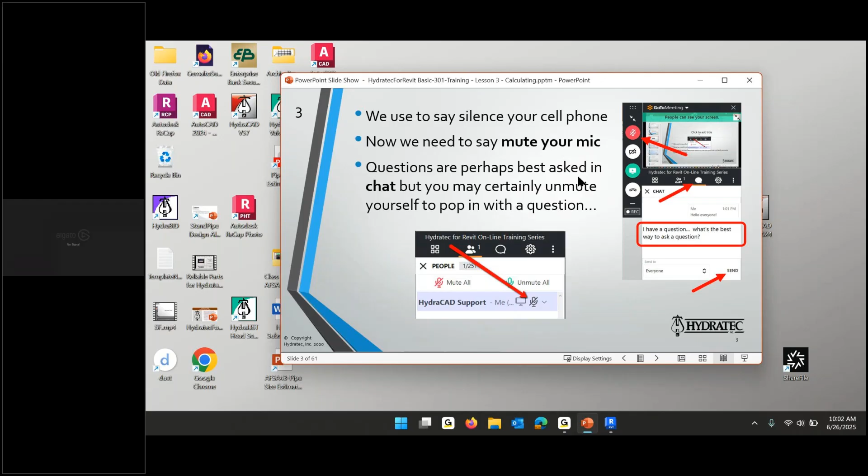Again, the first couple of slides, everybody's been great. I can't think of a class I've enjoyed more in terms of interactive response and everything. So keep that up, and if you need to, you can call in.

And we got here, Brian. Does this look familiar to you? Yeah, some of the stuff though is not on that sheet. You're right. We got almost here, and we left like 6 or 7 slides last Tuesday that we said, okay, we're going to come back on that. And I said I would take those slides, like this detail and this legend.

There, we didn't get to them, but I'm going to. I took those slides and added them into today's slideshow, but I added them at the end because getting our work documented, getting it on a sheet to print out, that's an anytime project. In most cases it's at the end of the project. You get it drawn, calculated, coordinated, stock listed, and maybe before the stock listing you want to get it printed out and sent for submittal. Then you get it stock listed, and then you need to get it printed out for the field. This is meant to be that documentation on a piece of paper to go to the submittal or to the installation. However, you can do it anytime - as you go, at the end, or in the middle.

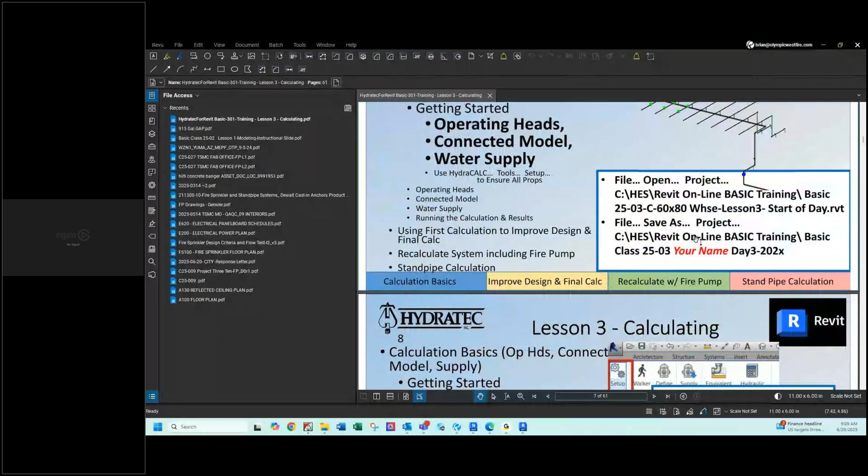All right, so sneak back to Revit, and we're going to do what this thing says. And I'm going to drag everybody through that. Yeah, I like what you're doing there.

If you click there, let's even close this project and reopen it, Brian. So just pick the X on fire protection floor plan. Yep, and save or don't save, I don't think it matters, we haven't made any changes.

And did that close Revit? Yeah, we didn't really mean to do that, but go ahead and open Revit again. Yeah, I know you picked the X on Revit, and yeah, that worked.

But I'll remind you that there are tabs in the drafting area at the top of the drafting area, and there was an X on the tabs that we had open. And if you do that, it closes the project without closing Revit. But now in here, I want everybody to see us pick the open dot dot dot button.

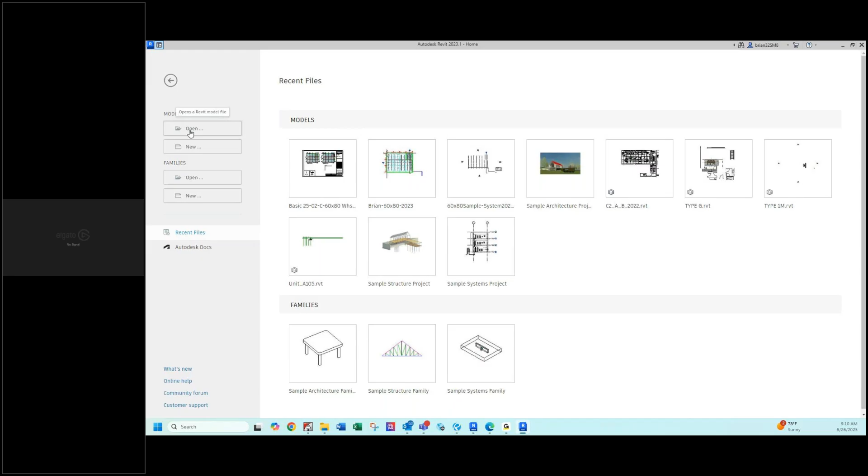And then drive to C, HES, basic training. That's it. And in here, we should find that start of day... not that one, the one that's at the top of the list, Brian. That start... of day 3. Yes, start of day 3.

And I sent it out, I'm going to say mistakenly. I intended to send it out as version 23. I think that's bad on my part. I tweaked it and saved it on my disk, and I didn't put it in the zip file. We're still good, but that's me explaining to myself why we're doing this upgrade. Anyone using 24, 25, or 26 would be doing an upgrade anyway, so it's not bad that we're doing the upgrade.

And as soon as this is open, Brian, we're going to remember to do a file save as and put our name in the file name and resave it. That will do two things: it'll identify it as us, but it will also keep us from having to run that upgrade again if we open that newly saved file.

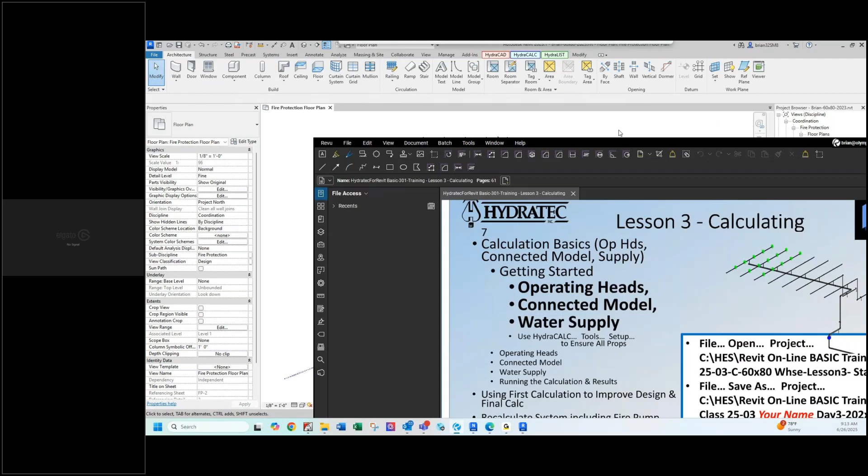We found the fire protection floor plan, and that's a place for us to work. If you could put that slide back up on the screen, slide 7. Then move on down to slide 8.

The first thing we're going to do, talked about in slide 8, is run the setup button. We're going to go to the HydraCALC ribbon and pick the setup button, and that's going to make sure that the project, whatever state it's at, is prepared for doing hydraulic calculations. Specifically, we're going to make sure we have properties on all of the sprinklers, the fittings, the pipes, and the valves.

Those properties came either from Hydratec or from whoever built the family we're using, and it adds those properties. It's best run after you're mostly done with the modeling so you have sprinklers, pipes, fittings, and valves in your project. Once your project has those parameters, anything new that comes into your project will assume those parameters, so you don't have to run setup over and over every time you run stock list. Once per project.

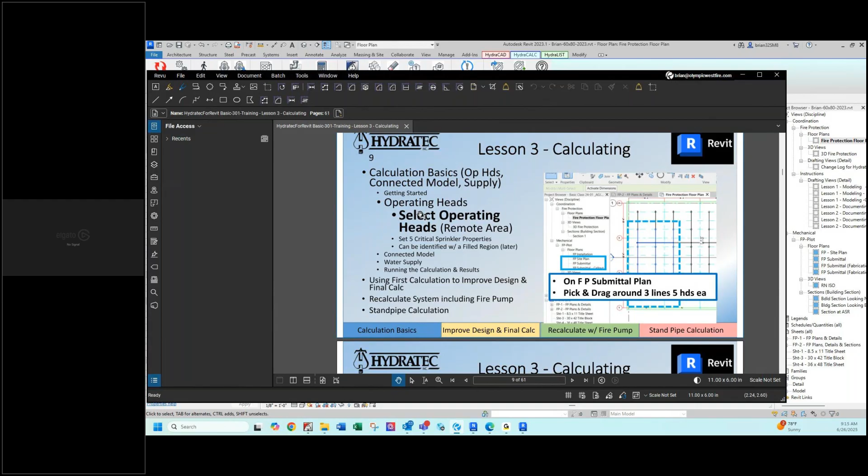There's two ways to do that. You can actually draw a box around it and use the box to identify the heads. But in this basic first time around, I'm just picking the heads and telling those heads that they're operating. So on that FP floor plan that you opened, we're going to click and drag a window around 3 branch lines, 5 heads each on those branch lines.

I like where you're starting, and I like where you're going - that's going to be perfect where you're at there. Now, obviously, Brian, when you pick that, you got pipes and fittings and sprinklers. But if you look in the properties box right now, it says common 64. Do you see that at the top of the box there? Yes, that's you picked 64 items.

If you do that pull-down, it says I'm trying to show you the properties that are common to all 64, but there's sprinklers 15. Click on that - now the properties box dials in specifically to the properties for those 15 heads. Even though you picked pipes and fittings and stuff, there's the properties of the 15 heads you picked. You like it? Yep. And scroll down to fire protection.

I'm going to skip one slide ahead here, and we'll review it in slide 10. In slide 10, we say the fire protection has 5 properties we really care about. The first is density, and that's already 0.15 - over a week ago, when we did the spacing and layout, we put 0.15 in when we laid out those heads. Minimum pressure, we put 7 - we did that also. And the 100 square feet area, we did that also. So those three we kind of got for free.

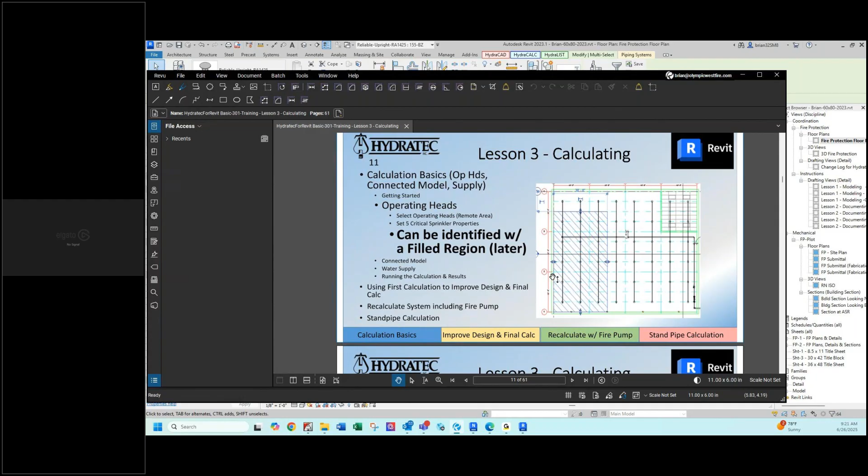Okay, let's go on to slide 12. And that's the middle of the song, connected model. And all that means is we're going to have a supply point, that's where the water comes in. We've just identified the operating heads, that's where the water comes out. There obviously has to be a path for the water to get from the supply out to those heads.

And this slide shows us using the walker, and the walker lets you pick a pipe, and every other pipe that's connected to it will get selected. Easier, I'm telling you, it's easier than picking a window around stuff, because the window sometimes can miss things. The window can't possibly go off of this view, but the walker will. It says that one's connected, I'm selecting it. That one's connected, I'm selecting it. So even if we were zoomed in and we were like real close to the remote area and we picked one pipe, it would find all those other pipes connected to it.

I think we can treat ourselves to slide 13. This was just saying the walker's a good idea, and 13 says you actually type WW or you pick walker off of the HydraCAD, HydraCALC, or HydraLIST ribbon, and then you pick a pipe and you'll see everything light up. Let's just go do that, prove it to ourselves.

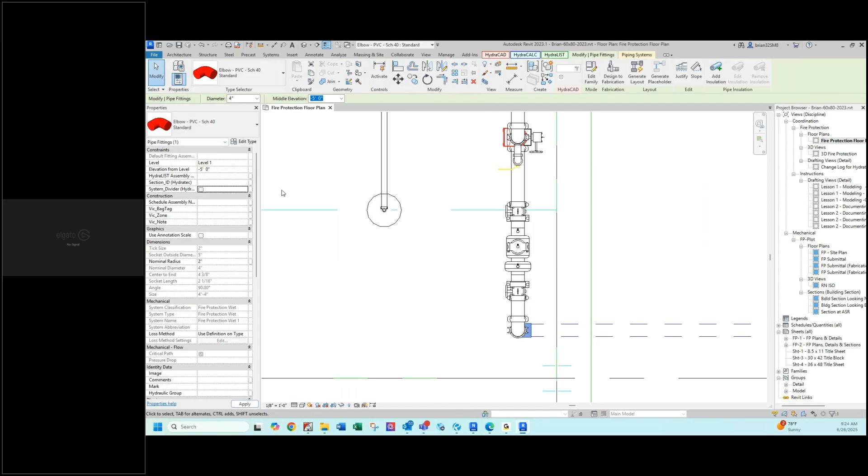And the properties for that elbow in the very top set includes a property that says system divider, and it's a blue check mark. Uncheck that and do the walker again.

Okay, do you see what happened? There was a property on that elbow that said, don't go through here. It's a system divider. So the walker sees that and says, oh, I'm going to stop here, he told me to stop here. So I can take my system and divide it up into various pieces if I want to.

Is that for any fitting we can put that on, the divider? I'm sorry, say again, can we put that divider on any fitting? Any fitting or any pipe, got it, and even on a valve. So pipe, fitting, or valve.

In the bigger picture, say I had a 4-story building, when I run the calcs, and it's not bird caged, when I run the calcs on the third floor, I want all the piping on the third floor. I might even want to stop there and just do a calculation to the floor control assembly, or I want to do all that piping plus the standpipe, the interfloor connections. But I don't need to submit for calculation the second floor, the first floor, or the fourth floor. Things obviously go better and faster if I'm sending what needs to be calculated, not the whole world.

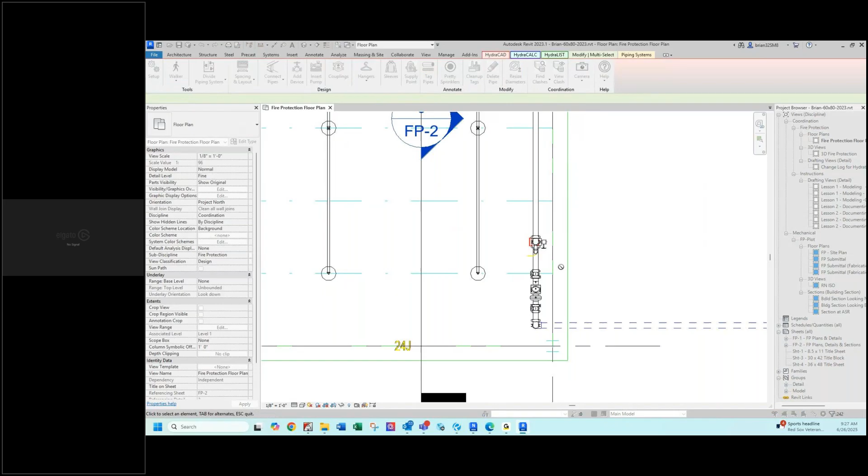And pick on the underground. So you see, you can get multiple selections by using the walker over and over.

And if you had a huge warehouse, a 1,000,000 square foot warehouse with 30 sprinkler systems in it, if you're calculating system number 9, you only want to do the walker. It would be good to have a system divider on each control valve, and then you could click on system 9, and you could click on the underground loop, and you'd have all the piping that you needed for that.

Brian, had you used system boundaries in HydraCAD before? I haven't, now I've used the stop function. Yes, that relates more to the stock listing, but it's, yeah, this idea.

I want you to do all this stuff, but stop here, and this is that idea. If you'd used the system boundaries, it's a much bigger pain in the neck than this because you've got to draw a boundary around the stuff you'd like to isolate, and that's not always a rectangle. It could be a rectangle with a long tail on it for the underground or something.

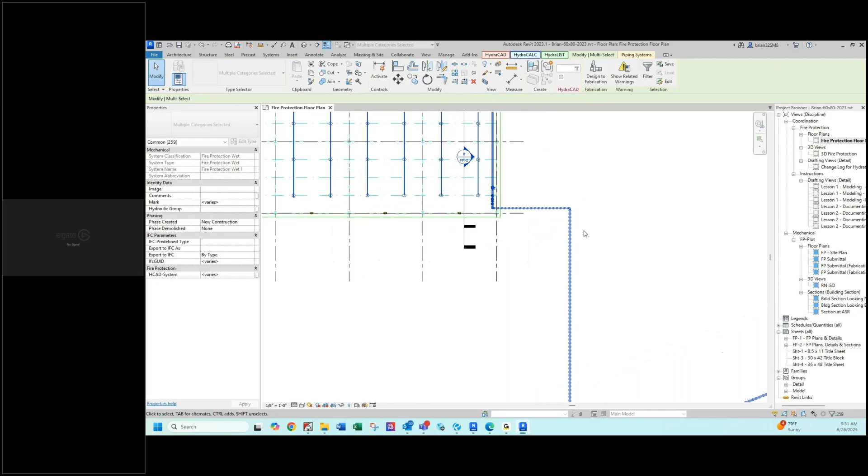I'm going to go with this slide. There's really no reason we couldn't calculate out to the street, but I'm going to have us follow what's in the slide here. We're only going to calculate as far as that first elbow in the underground. So if we go back to the plan view and zoom in on that first elbow, perfect, and then go to the HydraCALC ribbon.

Over on the left in the setup panel is supply point, three more buttons to the right there. No harm in running the setup any number of times — you only need it once per project, but no harm in doing it multiple times. And now pick that elbow.

I think on slide 16 I describe a little bit more about that. The supply point can be on slide 17 — I'm sorry, I lied. The supply point can be on any fitting. An elbow is a fitting, a T is a fitting, a butterfly valve is a fitting.

That was a question, Brian — a quiz. Elbow is a fitting. Butterfly? Is it? It's a valve, but yeah. So elbow, you and I might loosely think of it as a fitting, but I'm going to take this opportunity to say...

Revit has four basic components of a sprinkler system, and each of them behaves in its own way. A sprinkler doesn't behave like a pipe, does it? No, it doesn't look like a pipe. You can't make it longer or shorter, you can't change its diameter. It's pretty much a fixed device.

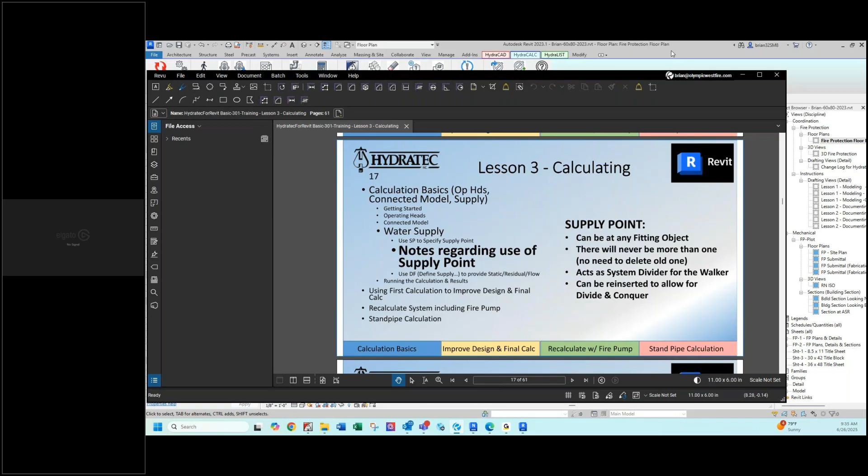Sneak back to AutoCAD, to Revit. David's the one that wants to sneak back to AutoCAD. And now WW for the walker and pick on the sprinkler system.

And then WW to get the walker going again and pick on the underground. Remember, the whole underground lit up before, but now only to the supply point. The supply point is acting as a system divider. Is that right?

While we're here, this is written on slide 17, but you don't have to go back there. It says it can be reinserted to allow for divide and conquer. I want to credit Julius Caesar for divide and conquer. He would go conquer a country in the middle of two other countries, and then he could pick on the other guys one at a time, rather than trying to do battle with the whole of Europe at one time.

When we try to run a calc and we get a problem and we can't get the calc to run, we can play like Julius Caesar and divide and conquer. Zoom out just a little bit, and presuming we have this selected, David, Brian, and we want to run a calc, and for whatever reason, the calc won't work. We say, what's wrong?

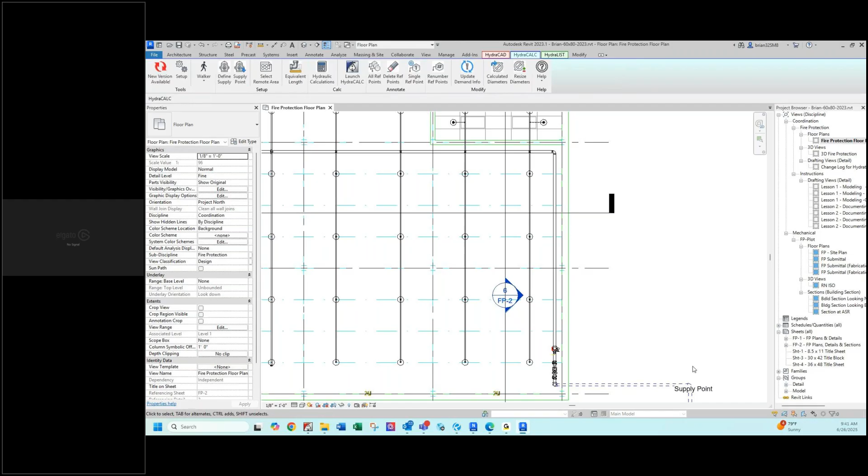Okay, so let's put the supply point back at that original elbow. You just pick supply point. And there it is. Okay. I don't know if I got it on the elbow. There we go. I don't blame you for wondering, I was sort of wondering that too.

I think it's actually okay to move it after if you want. Go ahead and move that out off to the side a little bit. Just grab it and move it.

That elbow was drawn funny. It's like 4-inch pipe to 6-inch pipe, and it drew a 4-inch elbow and then put a reducer. That reducer is a fitting, and when you put the supply point in that area, it went on the reducer instead of the elbow. I don't think it would change the calc, but we noticed it, and now we're convinced it's on the elbow. That's a good thing.

Okay, let's treat ourselves to slide 18.

We've done the where is it, and now we need to do the how much is it, and that's a button that says define supply, or just the shortcut DF. I show picking it off to the side of the riser in the plan view, and it's going to be 55, 44, 11, 50.

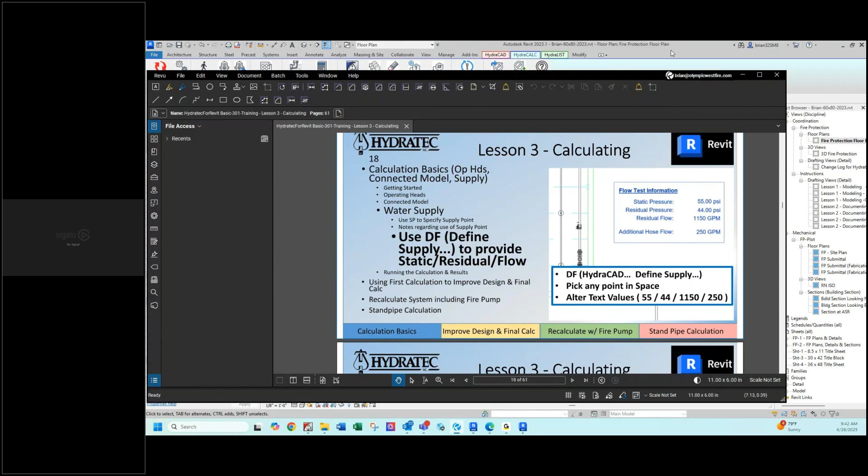So back in Revit, we're going to click define supply, and we're going to pick off to the right of the riser there somewhere. And now it's movable anywhere you want, and we want to define 55, 44, 11, 50.

Two ways to do it. Click on the box itself anywhere and select the whole box. Do you see the properties off to the left in the properties box? You can change the numbers in there.

Alternatively, if you pick again, you could highlight the 90 right in the drawing and change it there. Either one. Watch, when you change it, you're changing it in both places at the same time. 55, then 44, then 1150.

Perfect. And we'll leave the 250 for hose. Is this a tag or what is this?

It's a generic annotation. That must be a Dave question. Does that have a follow-up question, Dave? Nah, I understand now. I was just wondering if it was tagging something, but you said it's just a generic annotation, a generic tag. So it needs to be in the model, but it doesn't actually associate with an object. Just wondering if it was associated. That's all. So, but it's not.

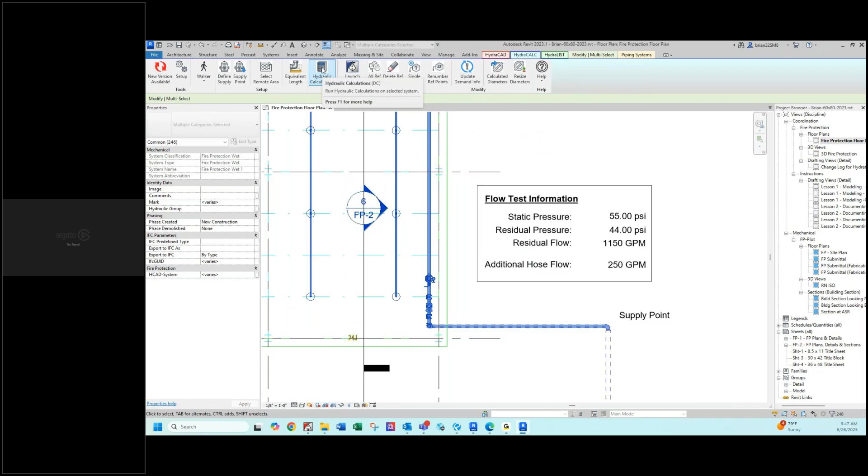And we're going to... give me a second, that's just saying there's a newer version. That's not 'you're dead in the water,' it's just okay, there's a newer version. So we're going to say okay. And there's that dialog box.

Now I guess I'm going to divide this up into two major things that we're trying to ask for in this dialog box, Brian. The stuff at the top is what do you want to calculate, and where do you want to put that calculation. So this is going to read the model.

It's going to create a WXF file, an input file for the standalone calc program, and the name of it is going to be Brian 60 by 80 2023. And off to the right, you see where it says area and it's got RA1?

We only marked 15 heads. But if we had marked 15 as RA1 and a different 15 as RA2 and a different 15 as RA3, we'd have a choice of which one of those three we want to calculate. That makes sense? Yes. There's two relatively new buttons right below that.

That's it - load defaults, apply. Okay, next one. Now I understand. The apply button - it felt like you were applying underground or something. That's not what I was doing. You're applying that whole grid of information.

I got you, Alan - is this something we have to do per project, or just a one-time setup? Once per type of pipe you ever use.

Got it, okay. Now quickly put Brian back in charge. Okay teacher, I don't know if we need to do that. Okay Brian, you're invited. Thanks.

Does everybody have this newer matrix filled out, and does everybody have a continue button that's lit up? Yes. Would we want to change the welded lines to Schedule 10, or just change it on this screen? Once it's in here, you can change it, but if it's not in here yet, you have to go back to that classic screen to get one in there.

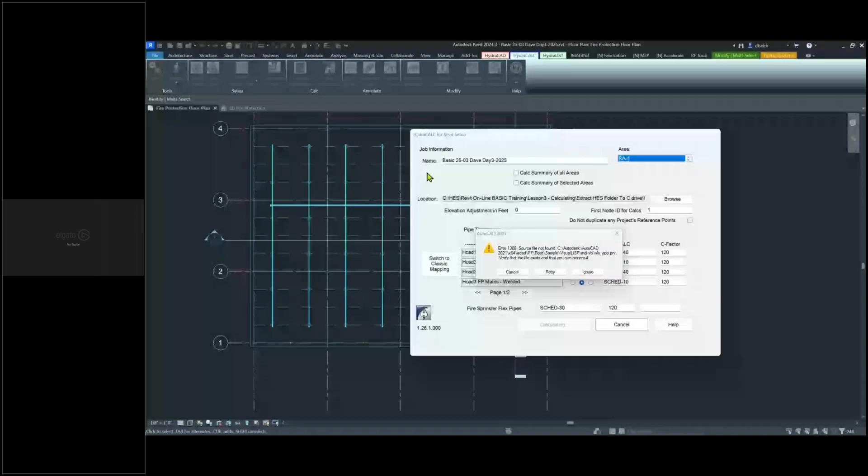There we go. Okay, so this, when I was talking about the calculation didn't work, this is an example of the calculation didn't work. Are you with me?

Yep, I'm following now. Error something, and this is a really weird one because it says AutoCAD 2021. What? I didn't know that we were AutoCADing anything. It's talking about C, Autodesk, AutoCAD 21, X64, AutoCAD, PF, Root, Sample, Visual Lisp, blah blah blah, PRV.

Verify that the file exists and that you can access it. I'm tempted to just pick ignore. Yeah, I'll say before that error popped up, there was one right before it. I can't move it onto the screen. It says, please wait while Windows configures AutoCAD 2021.

Yeah, okay. That is in, I'm suspicious that there's even a HydraCAD card for that. That's an installer problem in AutoCAD.

Okay, um, and I want to try and take advantage of the teaching opportunity here. Can you take a screenshot of this so that we can minimize? I'll take a screenshot and send it over to the chat.

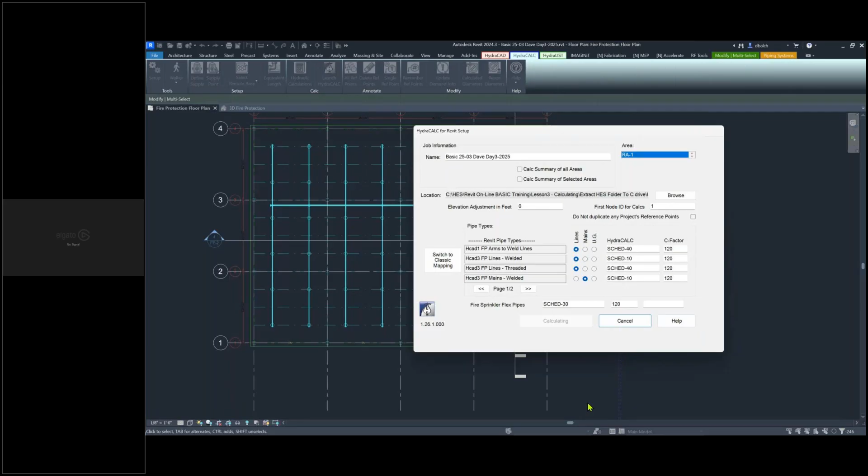I'll say one more thing and we'll keep moving, because I don't have a problem to show you. If you get an error like 1308, write down something significant about that error. Most importantly, hover over the last button you picked before you got the error, which was hydraulic calculations, and hit F1. That brings up the help for how that button works. Scroll all the way to the bottom, and there's a place that says troubleshooting. Click on that, and it gives you a list of all the ways it doesn't run. If you look at that list, I expect you'll find error 1308, and it'll say this is what went wrong, this is how you fix it. I've got to leave it there till I can really show you one, but that's probably one of the most important parts of the training I can give you: there is help for every error you're going to get.

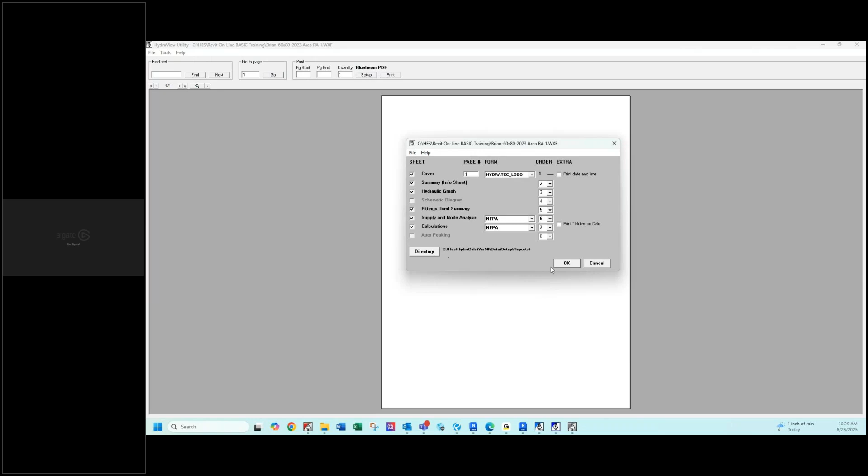And there's a cover sheet. Okay, we have to fill this in, and it says print the cover sheet, print the summary, print the info sheet, and the final calculations. Normally this is just fine the way the defaults are, so we're going to pick OK.

And here's the cover sheet. You see, this is Brian doing it, so it's got his company name in there. And we'll scroll down to the next sheet.

And this has the information we typed in a minute ago. We're on sheet 2, yeah. So RA1 is in there, OH1 is in there, the 1,500 square feet is in there. And I mostly want Dave, you to see this. These are the pieces of paper you're going to submit with your drawings to the authority having jurisdiction. And in place of just a note that said Brian said it works, I was going to use that one.

One more sheet. Yeah, this one has, if you look on this graph paper, Dave, on the left is point C1, which is 55 psi at zero flow, and C2 is 1150 at 44. Do you see those two points on this graph? C1, yeah, I see him. Yep, C2.

Those are those numbers we put in for the water supply, when we said define supply, way back with that generic annotation thing. Yep, 55, 44, 1150.

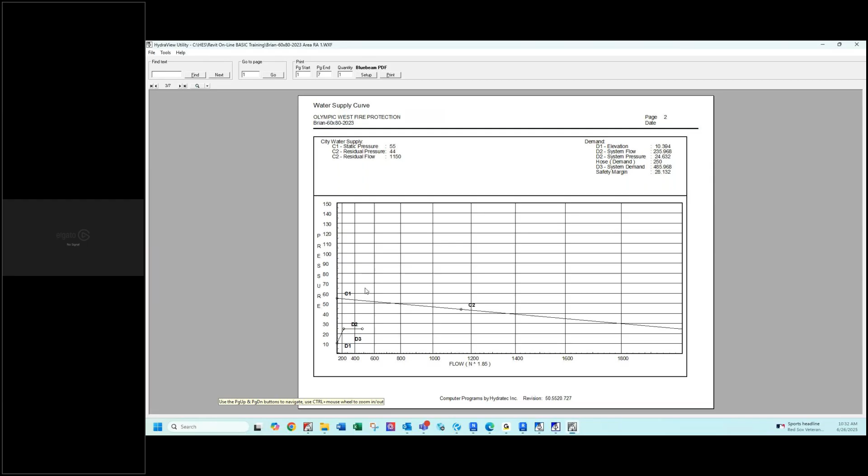We'll close this. And we'll close this, Brian. I'm promising you that it's going to get saved if you made any changes in here. Oh, I did have a slide about, did you close it already? Good.

28 pounds or 30 pounds safety margin is a little much, you think? Yeah, we might get away with the branch lines being 1.25 inches instead of 1.5 inches.

So let's click in the third column for diameter at the first one that shows up, 1.5, and then pick on the binoculars. And we're going to say change 1.5 to 1.25, replace all.

And now it's calculating with 1.25 inch branch lines. It just reminds us it did 18 of them.

We'll exit, and then we'll run that calculation button again. The yellow stuff should still be exactly the same as before. So we'll pick OK.

And now we're 24 instead of 30 pounds under the curve, so we still have lots of safety margin. We could play more, but I just wanted to show you, you've got this spreadsheet that you have control over, and you can say what if this, what if that, what if the other thing, before you return to the calcs. So we'll pick OK.

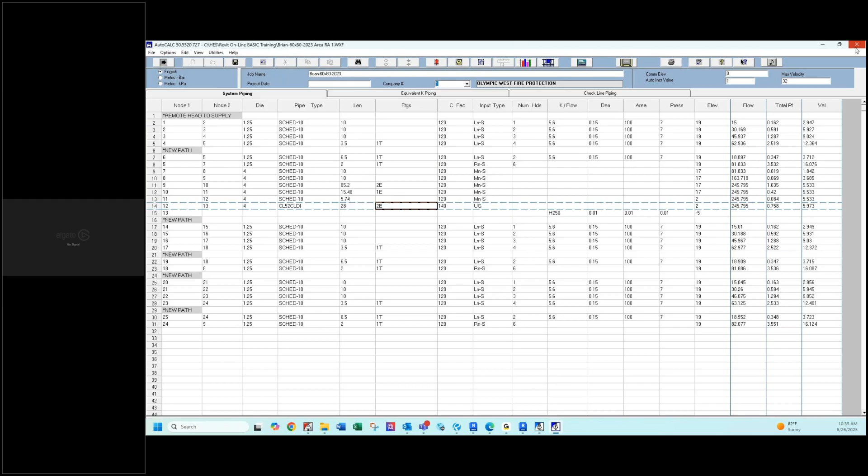We'll click the X, and you made changes, you changed it. They will be saved in this file when you pick the X. And go ahead and say yes, it's been a while.

Now that fuel gauge and the annoying questions are all gone, and we've run the calc. We're going to click on Return to Revit.

Two things are going to happen. First, it put hydraulic reference points on that we'll see in a moment, and it's asking us to park an answer block. I'm going to say pick up and to the right of the water supply information you've got there. Yeah, click there.

So there's the answer block, and you'll see in the answer block is the 1,500 square feet and the RA1, and the pressures and flows that we calculated.

I'm disappointed that it doesn't say OH1. That seems like it should have shown up. However, it's just a generic annotation. If you click on that dot next to occupancy, right there, click again, you could type OH1 in there.

Mine doesn't show the total required pressure. It shows the safety margin, but doesn't show either of the two above that. Then I'm thinking an update to the toolbox would do that. That block reports that generic annotation has changed a couple of times with the toolbox.

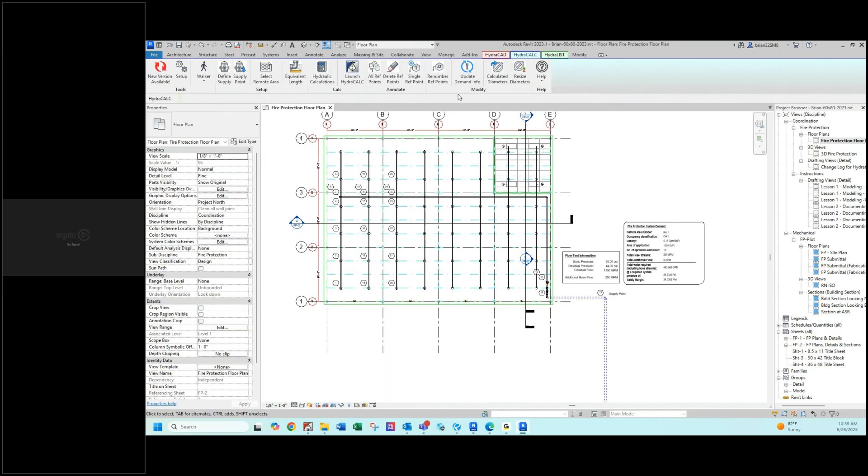There's no reason we can't do that too, Brian. Click that Update Demand Info and then click on that box. Well, it took away the OH1.

Yeah, I think we'll pay closer attention when we get into the calc, but I'm thinking that's blank in the calculation file. That's what's making me think that's why we missed it. I saw you type it, but I don't think we hit enter or something, Brian. We'll look again when we get there.

It was on the info sheet. Is it pulling some of that information from the actual cover sheet information, or is that pulling it from the calc itself? It's from the WXF file, which includes the cover sheet and all the input. Okay.

Okay, let's get back to having some more slides here. I want to go to slide 20. We probably have a couple of review ones. Slide 21.

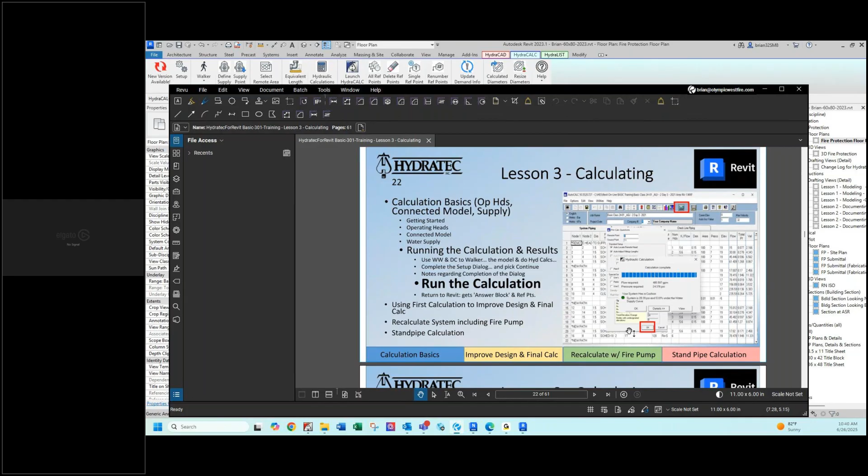Let's go to slide 22. When you're in the calc, you say run the calc and you check the yellow stuff, and then you get the answer.

But you could input all of that information directly from a napkin sketch into the standalone program. And that's a really good exercise for those of you that haven't been exposed to this program before, just to get an overview of the different things you can do in there.

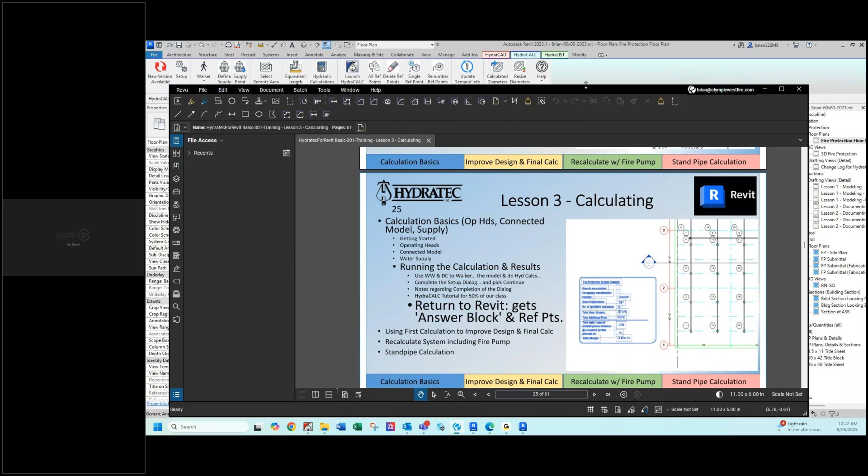And we're on to slide 26, which is yellow, which is great news, except by the colors, we're a quarter done with our slides, and we're half done with our time.

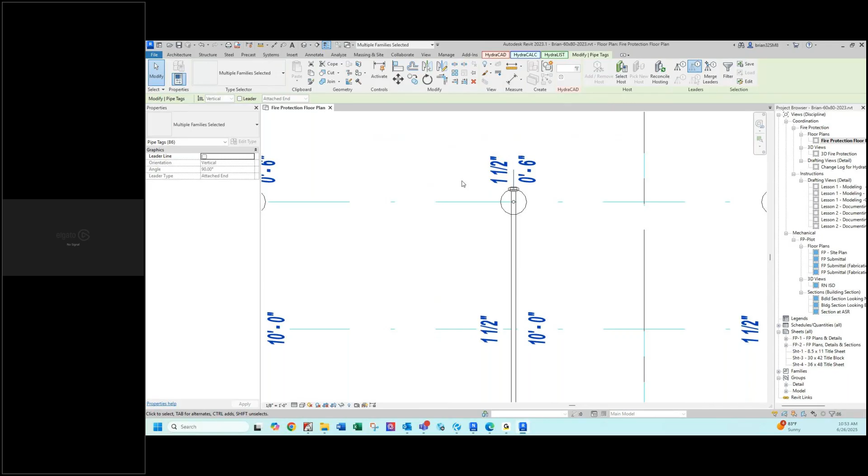And there's a box at the right end of the cross main that says, I did my best to clean stuff up, but there's some stuff in here that I'm not happy cleaning up myself. I just wanted to make you aware of it. So if you click on that box, you could erase it. Just hit the delete key.

And if you zoom in, the 4-inch, 3 foot, 6.5, maybe you could click on that and just use the right arrow to nudge it to the right a little bit.

And it looks like the 1.5, that one you could nudge up north a little bit. Okay, so he was just drawing your attention to that one. I'm sure John is going around and moving all of those things.

There's some cool stuff on the way for all of this dimensioning, but I don't want to turn this. This is a calculation process here, so I want to keep us after the hydraulic calcs. So let's go to slide 26, 27.

Hey Brian, is there another way to get the TP? For some reason my shortcuts don't work. Okay, yes, you go to the Hydra, it's on the HydraCalc ribbon and it's on the HydraCAD ribbon. Okay, HydraCALC, I'm looking at it, but I don't see TP.

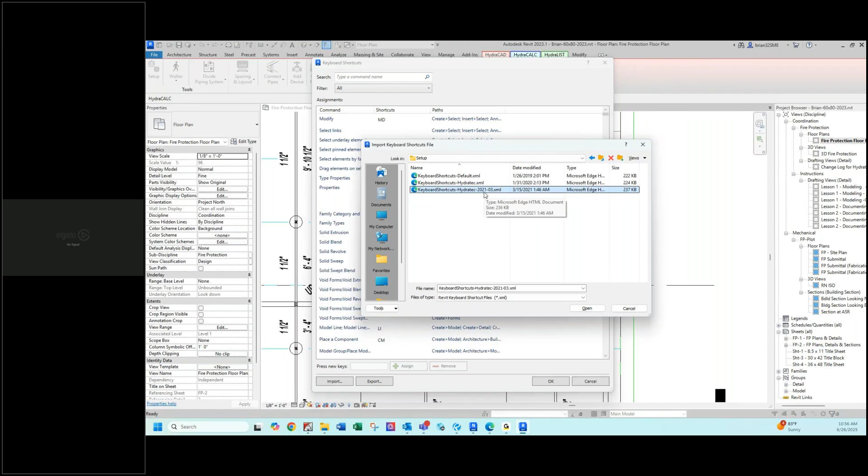Then pick open. Then if you trust me, pick overwrite. If you have done all kinds of customization in Revit already, pick merge. Then close this dialog box, then hover over the tag pipes button and tell me if there's cause for much rejoicing. Yeah, it's there now. Alright, thank you sir. You bet.

So on slide 26, I wanted to show you putting those tags on. On slide 27, we're going to talk about how we changed in the calculation, we changed 1.5 to 1.25, and I want to show you that there's a button to take advantage of that. And then even though there's a button to take advantage of it, I feel like there's a better way to do it, we're going to do that also.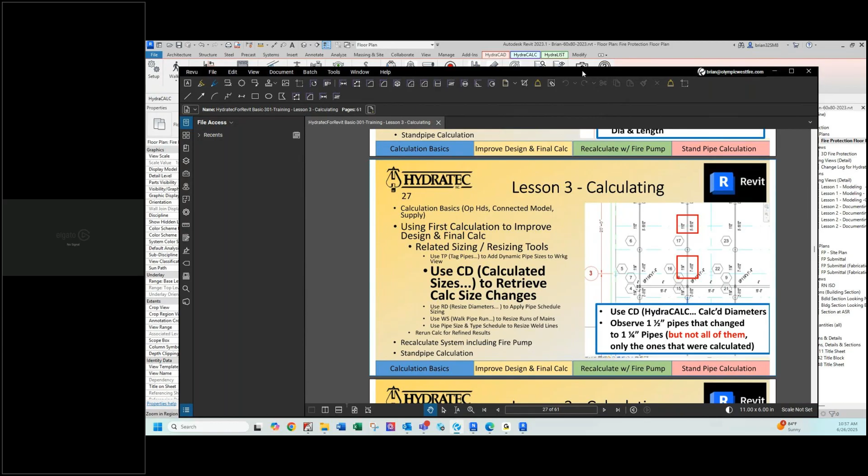But first, go back to Revit and zoom in on the calculated area so that we can see it. You see those diameters are all 1.5. Zoom out just a little bit so we can still read the 1.5s. Perfect, that's perfect. Now go to the HydraCalc ribbon.

There's a calculated diameters, or CD, pick that. And don't go anywhere, Brian. You notice the 1.25 showed up? Yep, cool. But look at the 4th branch line from the left there, how come that one's 1.5? It's not in the calculated area.

Exactly. This button is just a little, it is by its nature too literal. It says if it's in the calculation, make the drawing be like that. But it's not all of what we want to do. So I'm going to have you pick the undo button and get the 1.5s back.

Instead, I'm going to have you look in the project browser. There's a plus sign next to schedule/quantities. You're right there, click that. And then there's a pipe size and type schedule. Click that and open it.

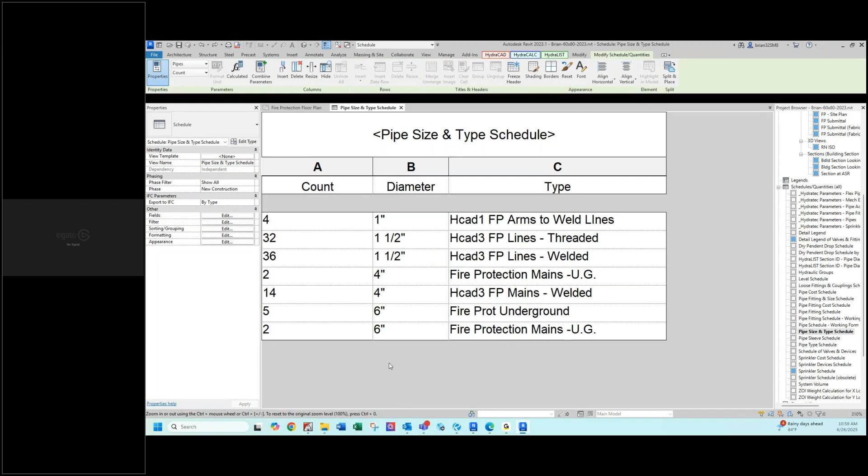And that's not unique to schedules, that's a standard feature for when you're using southwest.com or hydratec.com. If you go to the web browser, that scroll wheel makes stuff bigger and smaller. Who knew? I think that was only a Revit 22 or 23 new feature. Is it really? Yeah, well maybe there was no way, and then when they did it, they did it using sort of a modern standard. Yeah, 'cause I remember about it, Revit 20, Revit 21, it was always so small.

So it was lost on me for the next couple of years after that because I didn't think to use a web standard for that. Okay, cool.

Brian, do you see the third line down shows 36 pieces of 1.5 inch pipe lines welded? You click on that 1.5 inch, dial in 1.25 inch, then close the schedule. We want to do both, so we could also do the lines threaded. Now close the schedule, and we've changed them all. How's that for cool?

Nice. Alright, so what button is that again? We went to the schedule - the pipe size and type schedule.

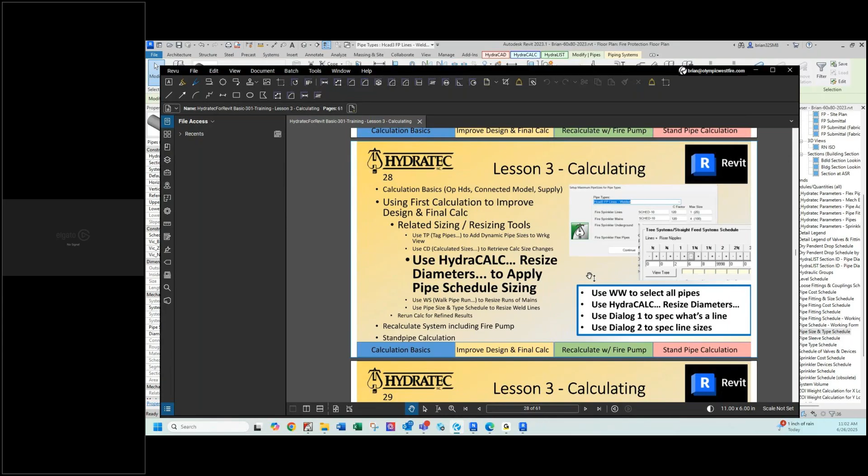There is another button that says resize pipe, and with it you can define what a branch line is. You want to be careful to define just the lines threaded pipe as lines - everything else should be mains or underground. Then that brings up a schedule where you can say I want 2 heads on 1 inch, 4 heads on 1.25 inch, 100 heads on 1.5 inch, and it'll resize the threaded branch lines that way. But we're focused on getting another calc here, and it's not even in that area.

So let's move on to slide 29. Here I want to describe how you could change the main. You could change it the way we did before with the pipe size and type schedule, but you could also take a run of main and change it. I think I want to do it and undo it, so I can show you that.

Go back to the Revit model. Find the cross main - I think it's a little north of what we're looking at right now. I want to show you the WS button, so type WS and pick on the cross main.

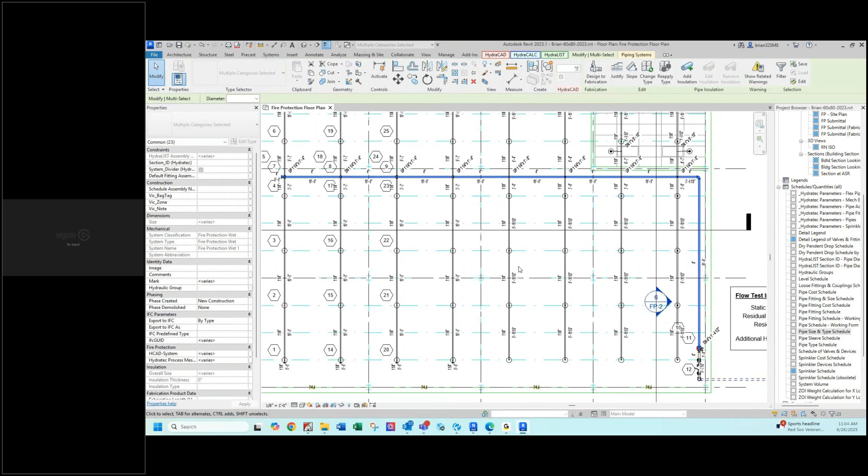So it's a way of getting a run of pipe. One more illustration: escape, escape, escape. Do WS and pick on one of the branch lines. By example, Brian, can you see what this is doing? It's doing a run of pipe. The riser nipple is not selected, and obviously beyond that isn't selected either. Got it? Is that based on pipe type?

I don't believe so - I think it'll switch pipe types. So if I change the pipe type halfway down the main to another type, would it still select it? I believe so, I'm pretty sure, though that's probably not terribly critical. If it didn't, then just do WS again on the other side. But I'm pretty sure it doesn't - it stops at T's, dead ends, and valves. Okay, that's a better explanation for me.

So you could select a run of pipe and just change the diameter from 3 to 4 or 4 to 3, whatever. We're going to keep going - we're not going to change it, I just wanted to show you that's available to us. So let's go on to slide 30.

Slide 30 is great because it's a summary. In the order of things, I said, oh look, we did calculated sizes, but I got a better way. So we used the pipe size and type schedule. We're experts at that now, so we'll go on to slide 31.

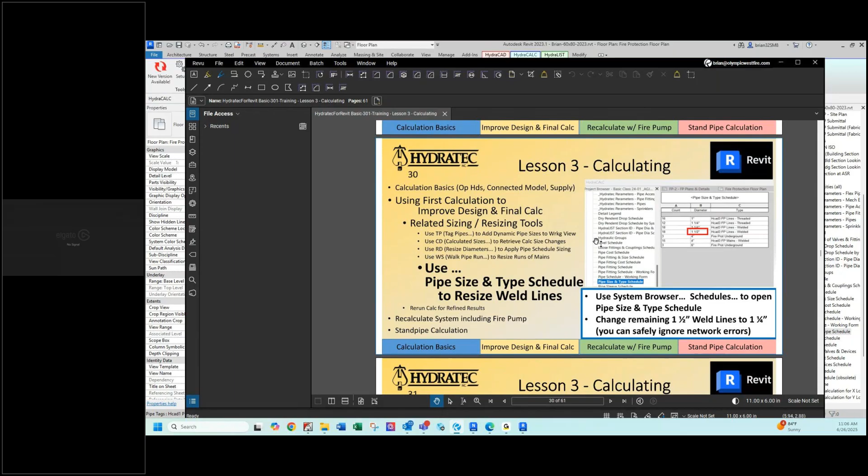Who was it that offered S101, S102, 103? I just mentioned that's how I normally tag mine when I do that. Brian, that's your plan. Cool.

So we're going to go tag them that way, and we're going to use the R button, or the renumber reference points button, and use your scheme. Let's go back to the CAD model, the Revit model, and on the HydraCALC ribbon is a button that says renumber reference points. Right there, pick that.

Then type S101. What this is going to do is increment the number at the end. So continue, and there's a reference point at point 1. Click on it, it becomes S101. Then click on 2, then 3, then 4, then 6, not 5.

Okay, yeah, we screwed up. We're going to come back and fix that one. It's on, mentally onto 6, which I want you to go to 14 and do.

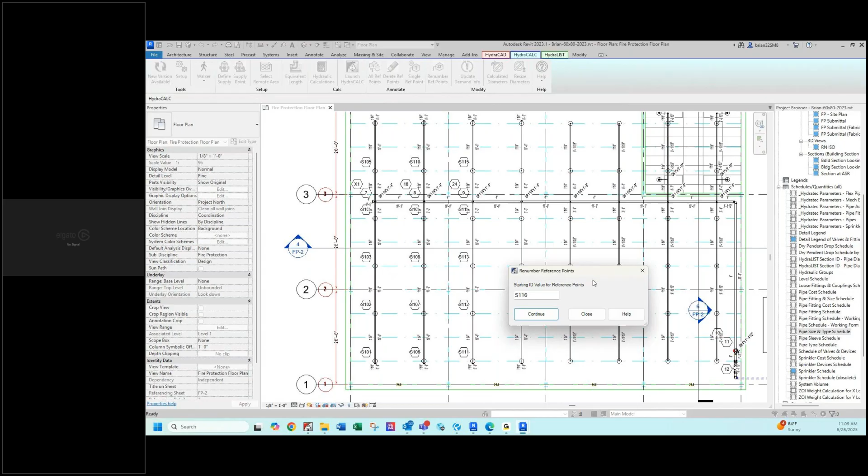Escape once. I think you said A101 for the riser nipples. Yeah, I usually do like B101 for the top, A101 for the bottom. Okay, so let's type B101. And click where it says X1, that's the top.

And then 18 is the top of the next one, and 24 is the top of the next one. Now escape, and A101. And then what currently says 7...

And zoom way out. I think 11 is, so 10 and 11 are like the top and bottom of the riser. And 12 is getting to the underground, and 13 is the supply. You might want to just say BOR, TOR, backflow test. Or do you want... that's the one that says 10.

And escape, escape, escape. You can use this tool that way if you want, but you can also just do them right on the block. So cancel this.

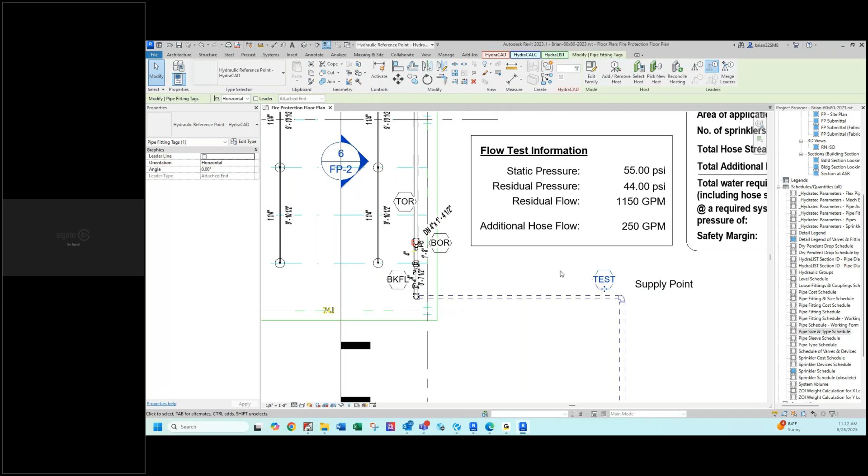Before I lose my train of thought, let's click on 13 and make it say test. Are these the reference points in the calculation, like the Excel looking sheet, when you said like 1 to 2 and 2 to 3? That's right, that's correct. And we're okay changing them. When we run the calc again, it's not going to use those ones, it's going to use these ones.

Alan, quick question: if you move an annotation, say top of riser, so it's clearer, is it still associated with the top of the riser? Absolutely, way better than AutoCAD. In AutoCAD we were using the location to match that up. Much better. Okay, I want to show you a couple of things.

Let's, in another operation, Brian, zoom to the connection of the feed main and the cross main. The diameter, the flow, and the pipe type, none of that changed, so it didn't put a reference point at that elbow. But we're going to, there's a button called single ref point.

Click that, then click the elbow. And drag that off to the side where it's readable. And let's just make it...

A104. So you can number reference points ahead of time, and they will be included and made part of the calculation, Brian. But that's not as quick or reliable as just putting reference points on, and then I'll tell you what I want them to be. Does that make sense? Yeah.

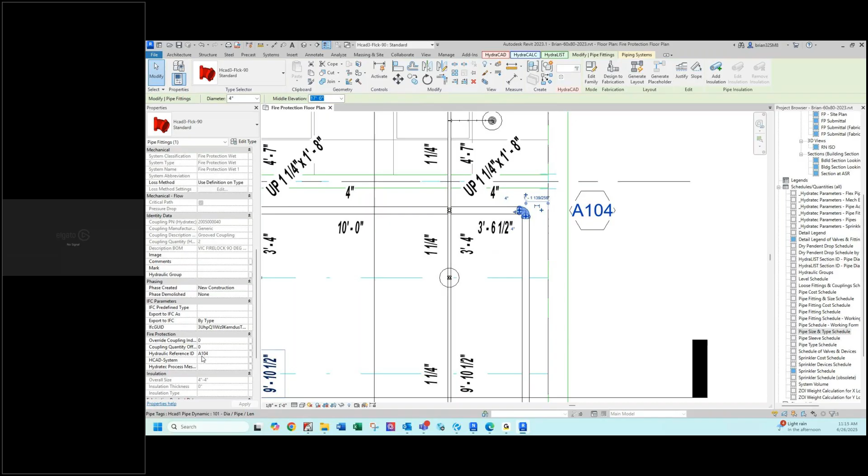Another cool thing about that is, let's go open up that section that looks at the riser, and pick on all reference points. All reference points is a button. You're on the HydraCALC ribbon. There you go, it's in the annotate panel.

No, when I said annotate panel, you thought I meant annotate ribbon. No, it's on the HydraCALC ribbon. The panels are those tiny words underneath all the buttons. Find the tiny word that says annotate. Okay, that gets you down to like 4 buttons. One of those 4 buttons is all reference points.

And I think in this case we got gypped because there's already a reference point there. I think I'd want to go to that other section anyway. Go back to the floor plan. Yeah, close this and zoom out a little bit. That's the section I want to go to. And perfect, okay, now do all reference points.

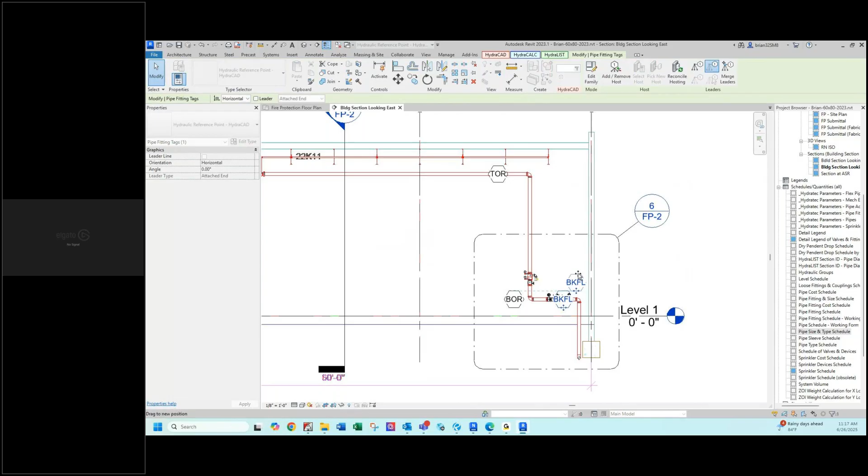Nice. And is our new one, A105, is that on there also? A104 is, but right, that's the one I meant. We put A104 on that elbow, and that elbow is in this view. And when we said all reference points, it says, oh, there's an elbow and it has a reference point, I'll put one there.

Good deal? Yep. Okay, so let's go to slide 32. And I told you that we could mark the most remote area with a filled region. I said later, and now it's later, so I'll show you how to do that.

So go back to Revit there. Zoom in on our 15 sprinklers that we're interested in. In AutoCAD, there is a Hydratec button that says tell me the distance between the heads, distance between the lines, and how many heads, and it draws a polyline for you that you can smush around. In here, Revit already had a legitimate tool for that, and it's in the Annotate ribbon.

So let's go to Annotate ribbon. I'm going to slow you down, Brian. When I say Annotate ribbon, it's the names at the top. When I say Annotate panel, it's the names at the bottom. Okay? Right?

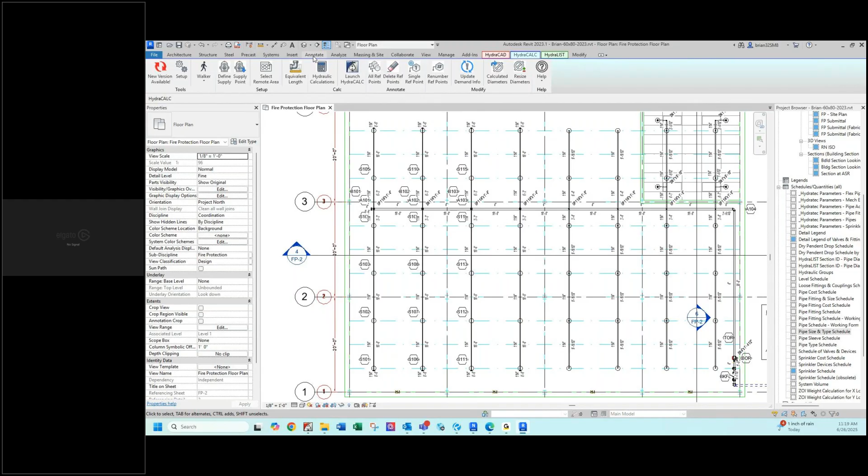And unfortunately there are plenty of duplicates. There's a modify ribbon and there's a modify panel on some of the ribbons. But on the annotate ribbon, in the detail panel, is region. There's two kinds of regions, filled region and masking region. We want a filled region.

And this is like drawing a detail line, and we've got choices for how to draw it. We can draw it one line at a time, or we could draw it as a rectangle. Do you see, most of the things are grayed out, but there's a big red X and a big green check mark three-quarters of the way across the ribbon buttons there. The green check mark says I'm done telling you this outline. The red X says I'm chickening out, I didn't want to do this anyway. But to the right of that, currently it says you're drawing this outline a line at a time. Go one to the right of that, it says I want to draw a rectangle.

Click on that and start your rectangle in the lower left-hand corner of the building. Can we take credit for that, or do you want to take credit for the inside of the walls? I do inside of the walls. Okay, so pick at the corner of the inside of the walls. There, perfect. So that's our starting point for our rectangle.

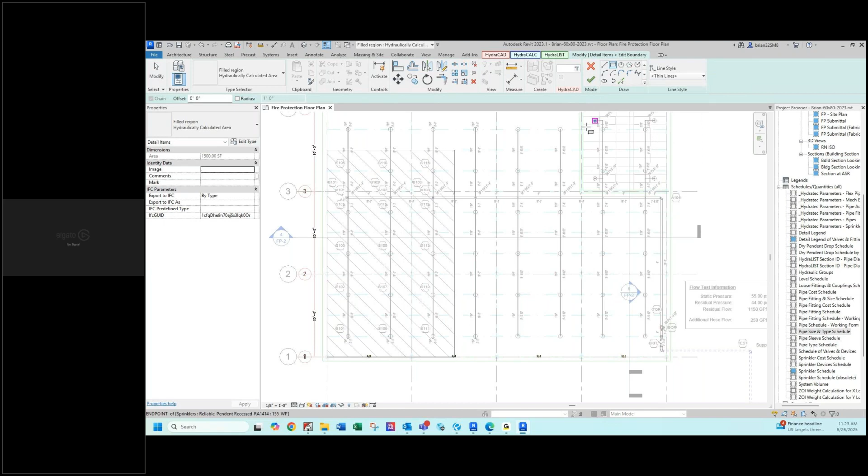Pick rectangle again now, and pick a starting point in the lower left-hand corner, but that's 10 inches inside in both directions. So from that corner, go up and to the right 10 inches and 10 inches. Don't start there, don't start there. Move in a little bit.

John, you tell him, where do you want to start? You don't know. Move a little bit to the right yet. Start where you... yeah, and now move up that much. Sorry, I was muted. Yeah, start in the corner, and then you can come over where you want it to be, and it shows you. Yeah, so start there, click there, and now click the equivalent point in the upper right-hand corner.

Nope, inside, not outside. There, click there. And now the green check mark. Ah, John, that looked pretty good? Yeah, that's the way I typically will do it. Okay.

I don't want to go too detailed, but you can draw the inner box with an invisible line and get the hatching without getting that extra line. Or you can draw the one and only box with a thick line or with a dotted line. So some people don't use a hatch at all, they just use a fat dotted line. I maybe want to say Google filled region and get more details about the variables you have on that filled region. But we got pretty close for you, John. You're happy? Yeah, it looks good. Excellent.

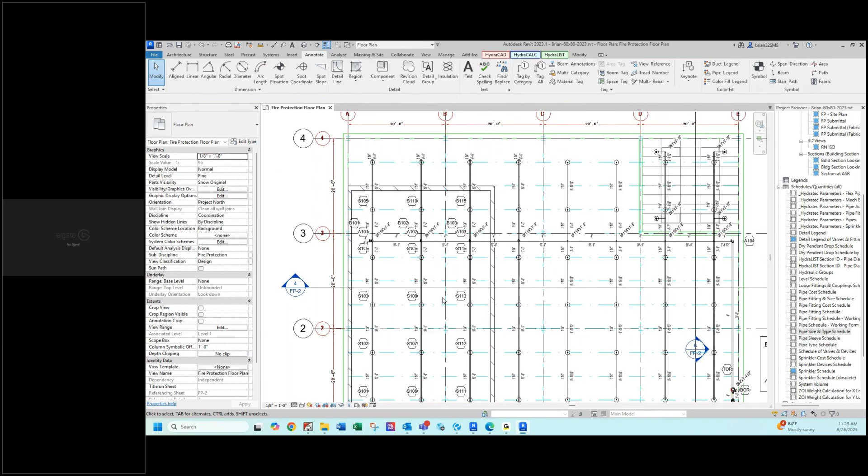So we're going to go on to slide 33. Real quick on that square, does that have to be perfect, 47'6" by whatever, or just close? It means to be an even number of sprinklers. Mhm. The line wants to be halfway between two lines of sprinklers, or between two heads.

And then the total area has to be equal to or greater than 1,500. So you're trying to get a 1,500 square foot area is what that is. 1,500 plus. The standard says no less than 1,500. Okay, and that's what it implies, and it's not 4.5 sprinklers long ever. It's 4 sprinklers long, or it's 5 sprinklers long, or it's 6 sprinklers long.

It's not 4.5. Okay, I understand. I don't know if that had anything to do with the design or calculations or anything. No, the design and calculations at most will say all the ones inside that area we're going to use. The way we calculated it, it was I told it those 15 sprinklers, and the purpose of this annotation is absolutely nothing except to note which 15 we use. Which 15 it is. Okay. Yeah, there's no relationship other than that. So equivalent lengths, we want to go back to that section that showed the riser.

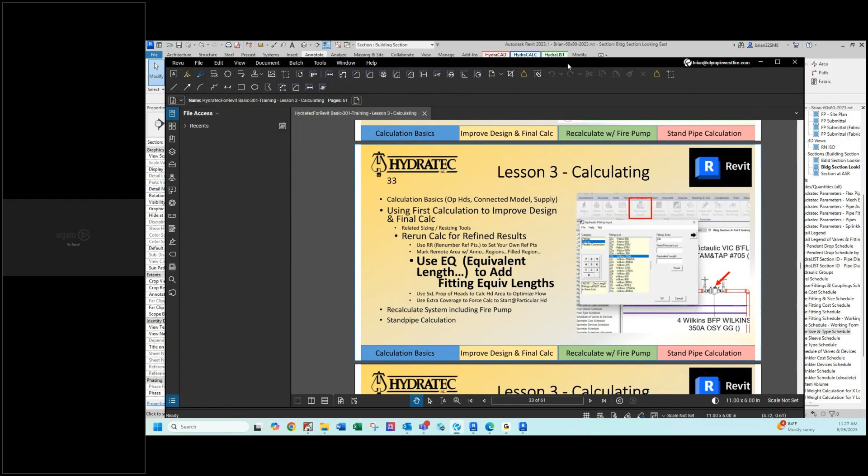So Dave, Hazen and Williams are 1900-ish mathematicians that came up with this shorthand formula for the friction loss through a pipe. And they said, we're all proud of ourselves, we've got the friction loss for a pipe.

And somebody said, well, how about an elbow? Is that a pipe or what? He said, well, there's more friction loss in an elbow than there is in a straight piece of pipe. So we're going to give you a table that says when you get to an elbow, count 10 feet of pipe instead of nothing. When you get to a T, count 20 feet of pipe.

And later, when the backflow people made their thing, they had to come up with what's the equivalent length of a pipe to calculate the friction loss. So they actually measured the friction loss and then backwards calculated that formula to figure out what equivalent that thing would be. Some of the tests didn't work out well.

Pipe implies that more or less twice the flow gives you 4 times the friction loss, and 4 times the flow gives you more or less 16 times the friction loss. It's the 1.85 power, not the square, so it's not exactly 4 times as much.

But when the backflow preventer people tested their valve, it didn't follow that scheme. So they said, we're just going to give you a chart. It says if it's this flow, this friction loss, this flow, it's that friction loss. So there's two different kinds of equivalent lengths, a curve and an actual equivalent length.

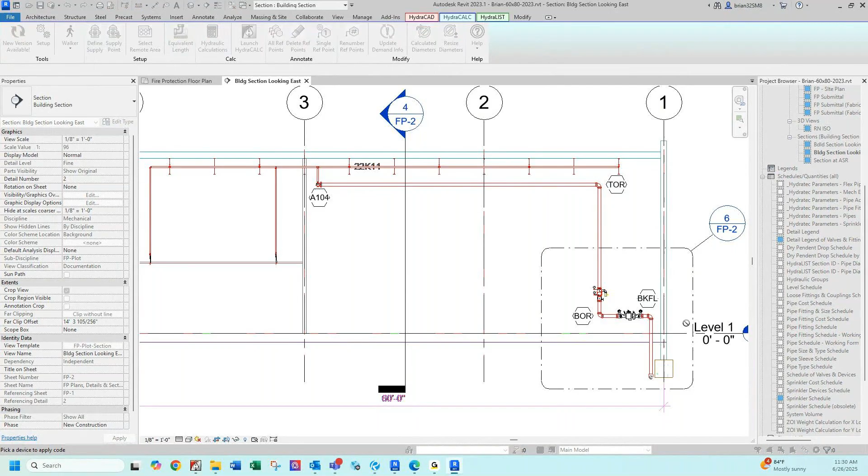Brian, this is a very familiar box to you. Yes. And in this case, I'm going to have you just pick the B that says NFPA 13 butterfly valve and pick OK.

And then pick that equivalent length button again and pick on the shotgun riser. That's it. And let's just use S for a swing check. So scroll down.

Yeah, it's possible if that's a reliable has a cut sheet and they told us equivalent length, but we're going to use a generic S for the swing check in there. Pick OK.

Then equivalent length one more time and pick on the backflow preventer. And this one does not have a fittings length, so we're going to go to curves and scroll way down to Wilkins 350A. There it is. And pick OK.

And we could have done that, maybe better have done that when we first put the valves in, and it just remembers forever. And then our first calc would have had those in it. But they're there now for when we run the calc again.

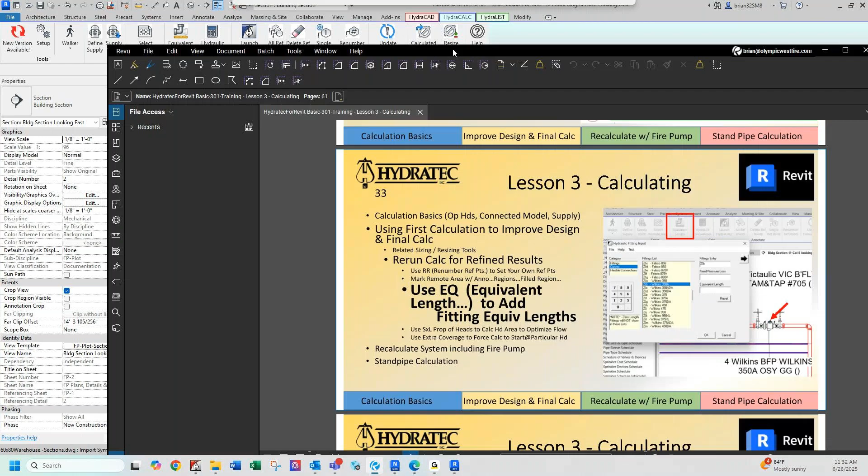So let's switch to slide 34. And this one I'm just going to talk about. There's a feature for the sprinkler where you can click on the sprinkler and say, show me a box that allows me to measure to the next closest branch line in each direction and to the next closest head in each direction. And if there's walls involved, to the nearest wall in each direction.

And it'll take all of those numbers and find the maximum S distance, the distance between sprinklers, and the maximum L distance, the distance between lines, and multiply that S by that L and report to us the coverage area of that sprinkler. Dave, in our sample, all the heads are 10 feet apart in both directions. S times L is 100.

But in an office building, that's seldom the case. And you may want to not just say they're all 225 square feet. I may want to measure each one so that I'm not flowing more water just because. I want to flow just enough water to get that density times area requirement to be met. Anyone have any comments or thoughts or questions on that?

Cody, I see you're called in. Can you hear me? Yes, sir. Cool.

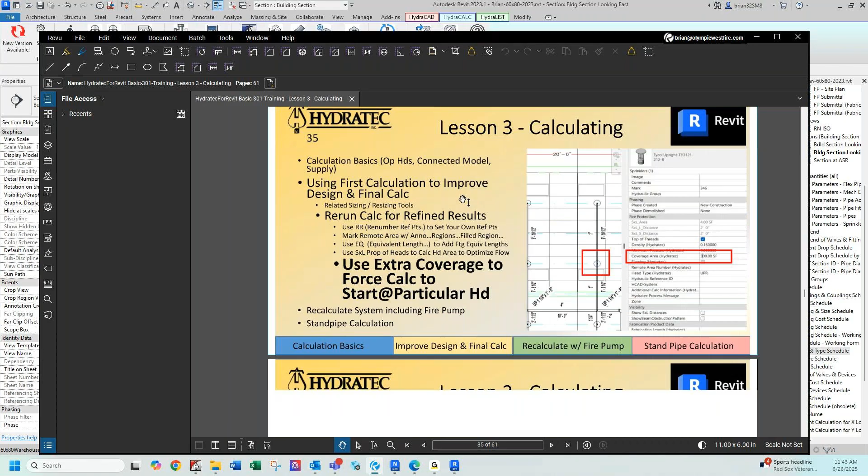And we've made some changes, and I want to rerun the calc. And when we do, I will have us take note of the fact that the reference points now reflect A101 and S101, and that the equivalent lengths are what they are meant to be.

Let's go run that calc. Back to the plan view is probably the best place to start. Do the walker, and then do the walker again, and then start the calculation. The walker the first time gets you this, depending on where you pick, it gets you the sprinkler system.

The walker the second time gets you the underground. I'll just warn you ahead of time, the hatch pattern in that annotation sometimes makes the pipes a little shy, so the pipe you pick more easily might be outside of the remote area. But I see you had no problem there, Brian.

You selected pipes with the walker, you selected them again. That makes a connected model. You've got operating heads, you got a water supply. Let's start the calc.

David, I cheated you out of the error checking that I was going to brag about. So after you run it, do you hit launch or do you hit hydraulic calculations again? Launch simply independently loads the standalone program, so not that. You want to pick hydraulic calculations.

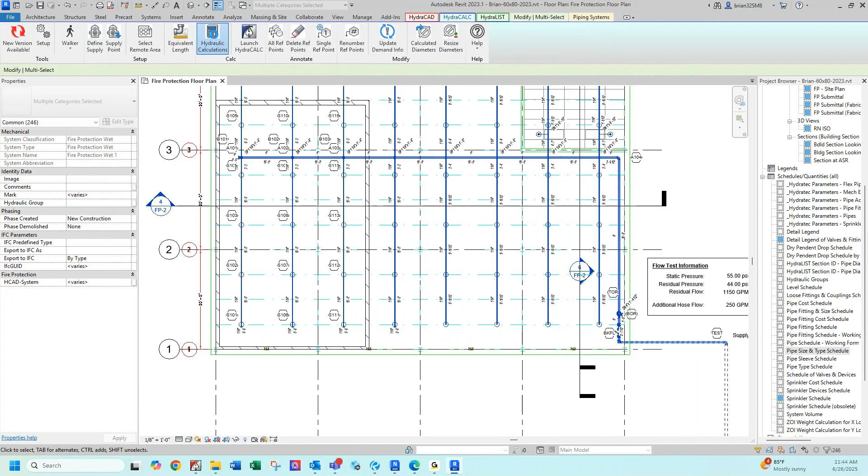Why? Look, this is all filled out for us. The Lord be praised, we don't have to do that load defaults apply thing. So you can just pick continue. And yes, it's there from before. We're going to write over it.

Yay, there it is. So I'm saying much more readable. S101 to S102 to S103. I put them on, I know exactly what that is. And it stops at B101, that's the top of the riser. And then it goes S105 to B to A102, 103, 104 — top of riser, bottom of riser, backflow, and test.

I love it. And look at rows 13 and 14 — they've got the swing check and the butterfly valve, and the other one's got the backflow preventer in it. Let's run the calc. Also, the diameters are 1.25 inches for the branch lines, and the mains are all 4-inch. So we'll run the calc again.

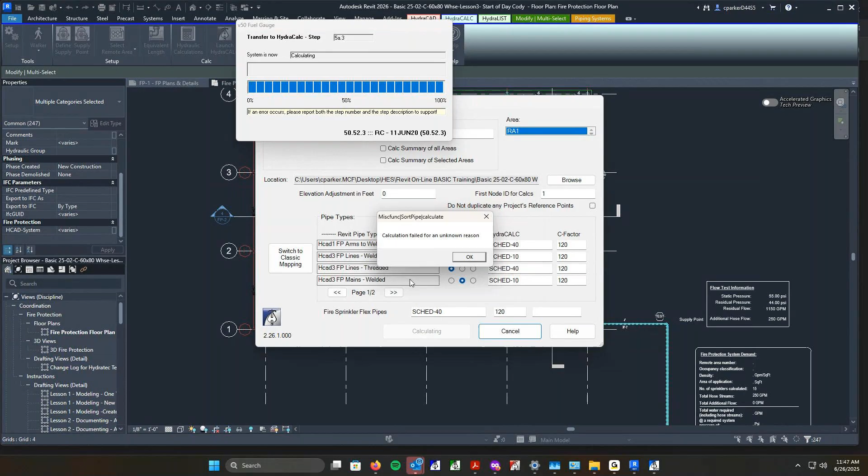Specified remote node does not have a K factor. Pick OK. Calculation failed. Pick OK.

Also, let's just double check that other page. This is page 1 of 2 that shows 4 pipe types. Just look at page 2 of 2 — that looks checked legitimately. Go back to page 1 of 2, and we've got all the lines are lines and the welded mains are mains. I like all that. And then pick, and this says return to Revit. It doesn't say cancel, so let's return to Revit.

And I just want to show you the error checking, the error messaging that we were talking about. And then we're going to run the calc again and check it.

Escape, escape, escape. Do the walker for me. And then do the walker again.

Let's see, I think we want to stop at test, we don't want — yeah, cancel that. I want to do the walker, and I want the walker to only go up to that supply point, the test point. So do the walker once. I don't think you have a system divider on the elbow that Brian and I had. You're walkering all the way to that supply point, which is the connected model. So do the calc now.

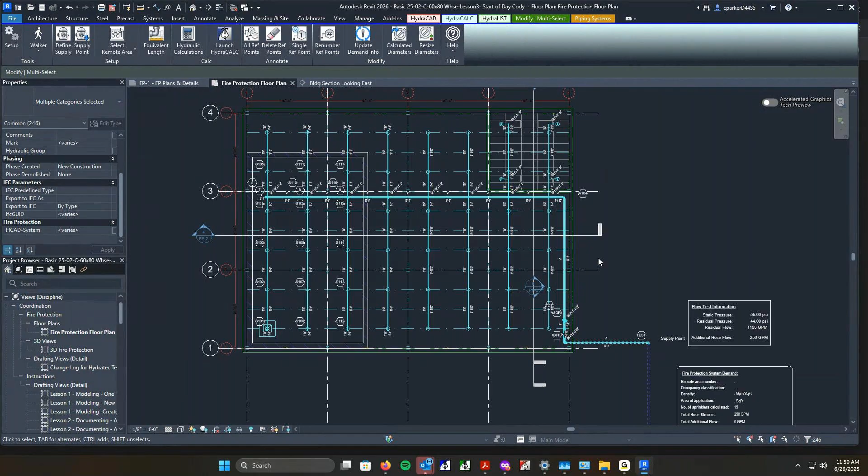I like that, so 19 pounds, that's what Brian had, and then leave here and return to Revit. I think there's nothing - like it added reference points that were already there, and it updated the values. Look at the answer block and see if the safety margin is 19 now. Yeah, so that updated. You with me? Yep, good deal.

Hover over the hydraulic calculation button and hit F1, and scroll all the way to the bottom. Now, this particular button has more ways, more things that can go wrong. It's bigger, we're doing lots and lots of stuff, and along the way more things can happen. If you're getting tired of scrolling to get to the bottom, you can use that scroll bar all the way on the right, but there is also... there, finally there. So there's so many different ways that things can go wrong.

We broke them up into: after clicking the continue button, during loading steps, after you're actually in the spreadsheet, and when you were returning to Revit. Do you see the different parts of this big operation where we might see that error? If you want to see them all, click on the one at the very top of the list immediately after clicking - yeah, that one, click on that one. That'll show them all. And this is almost embarrassing.

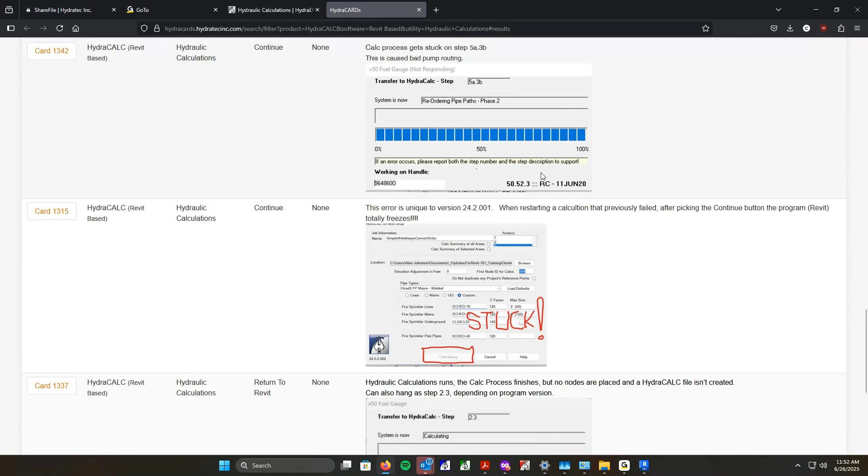And I think I've already accomplished what I wanted to here. You see what I'm after is that you could get an error and it's going to look like one of these. And if you find the one that you got, then you click on solution and it tells you what went wrong and what you do to fix it.

If you're like John or David, you may have already figured it out on your own, and that's okay. Well, maybe Chris did that before. Okay.

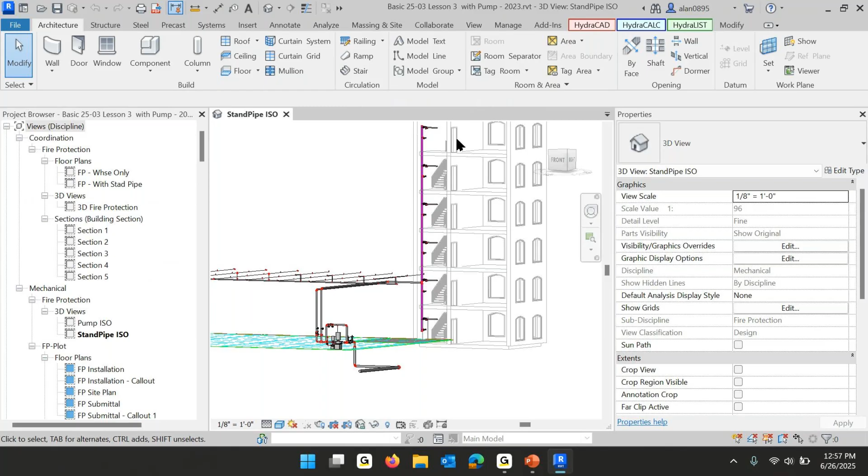It's very much like what we drew before, with that flat as a pancake AutoCAD background. There's our model, plus additional modeling for the standpipe and the fire pump. I'll show you that in plan view in a minute, but let's stick with the slides.

So I opened it. I'm going to use the walker to prove that it's all connected. Over here, I'll just WW, pick on a pipe, and that makes me think it is not all connected. Then I'll WW again, and WW again.

I had some system dividers in here already, but by walkering several times, I got the underground, the overhead system, and the standpipe system. I still have the bypass missing and the jockey pump loop missing, and I'll show in a slide why that's important when running a calc with the fire pump.

Back to the slides. I've proved that it is all connected. Now I'm going to add system dividers to isolate the sprinklers from the standpipes.

That's just clicking on the two butterfly valves and changing the property to set that system divider. I'm claiming we already showed that was done before I started here. I'm clicking on those two, and there's that system divider property.

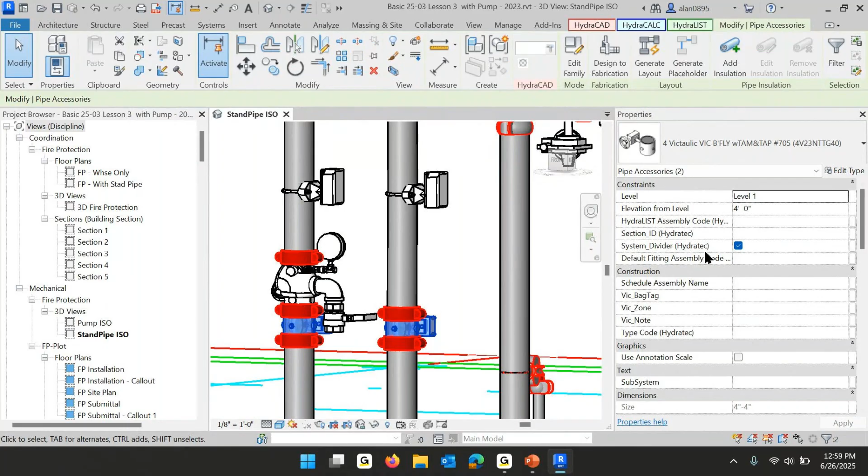If I uncheck that and do the walker, then clicking on any pipe—not the bypass—that gets the sprinkler system and the standpipe and the underground. All right, putting them back to system divider.

And moving on. Then I put more system dividers on: a system divider at the first and last pipe of the bypass, and the first and last pipe of the jockey pump loop.

That's because if I'm running a calc that includes a fire pump, I need the water to have to go through the fire pump, not sneak around the bypass or try to sneak through the jockey pump. I want one and only one path available for the water, and that one path goes through the fire pump.

So it was already done in this thing when I opened it, but if I click on this first pipe and this last pipe of the bypass, and this first pipe and this last pipe of the jockey pump, those things should all have system dividers on them.

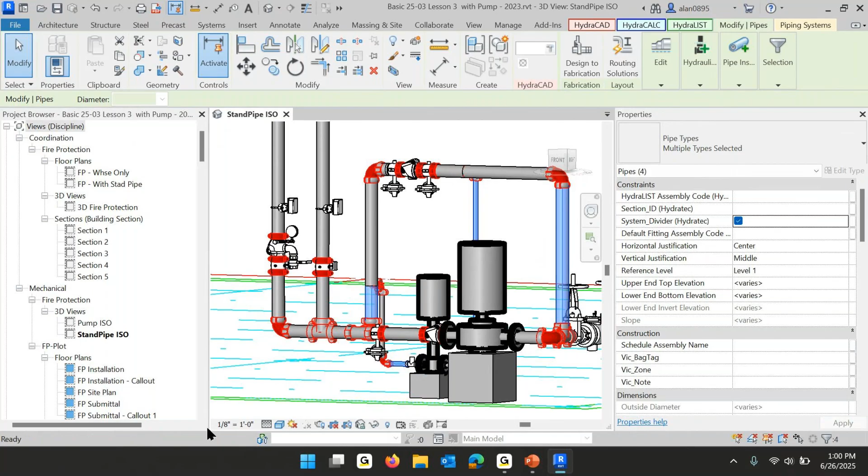Now when I do the walker, the underground, the selected pipe goes through the fire pump. It does not go through the bypass and does not go through the jockey pump. So there's no sneak arounds, no extra paths around the fire pump.

So if I wanted to run a calc on the regular sprinkler system, again, I would pick 5 operating heads on 3 lines. I'd make sure those 5 properties were filled in, and I would have operating heads.

Come back here. I'm going to go to the floor plan. That's not the floor plan. I think I'll use the submittal.

And I'm going to pick a window around those heads, and dial in just the 15 heads. I practiced this last night and forgot to unpractice it, so I already have that stuff filled in: 0.15 over 100 square feet each, 7 pounds, and I called it A2, and that they're flowing.

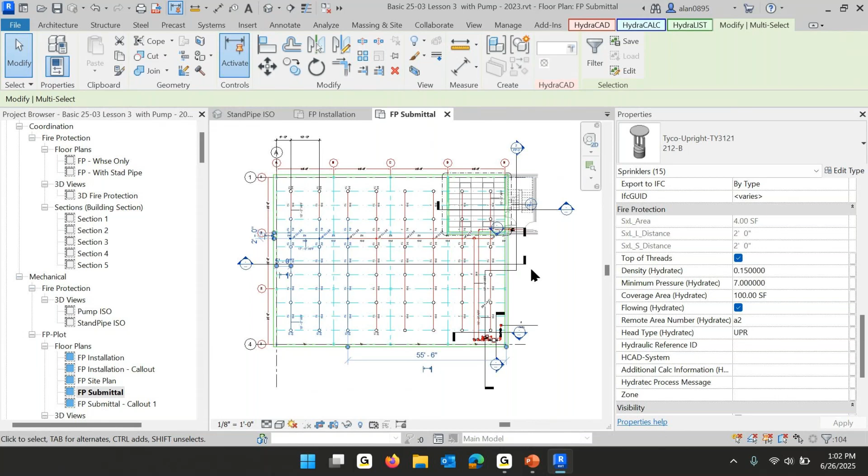I've already operated my heads. I've got a water supply I'm going to put out at the street. So the supply point will be the T at the street, and the supply amount is going to be 30, 25, 1200. So I'm going out to the street.

I'm going to see that on the site plan, and make that T be the supply point. And I'll specify the water supply numbers over here.

Maybe I can't put that thing on the site plan. Let me put it on the submittal. Revit encountered an error: parameter is read only.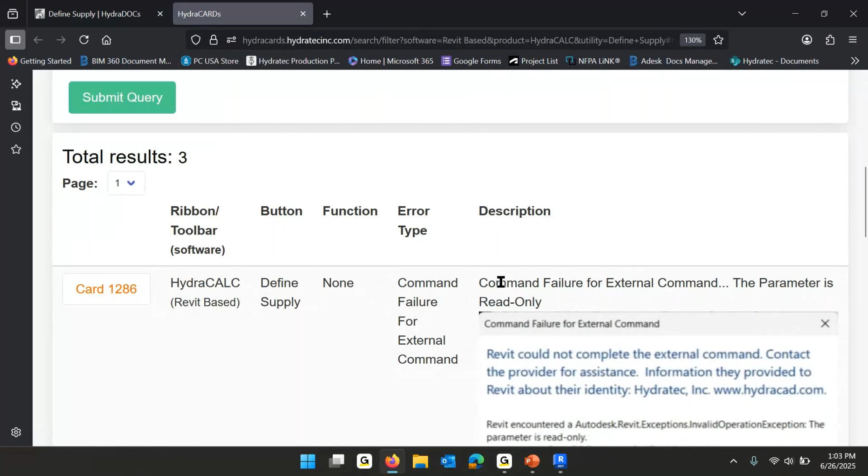So, define supply, hit F1, scroll to the bottom, troubleshooting: command failure, parameter is read only. What's the problem? The cause is when trying to insert supply, this error applies.

That's not a very good thing, but there are two solutions: one, delete the current water supply block, or two, make it so you don't have to manually delete the info block every time. However, that will remove the water test HydraCAD extended version of the water supply.

I think I'm going to navigate in the project browser to the water annotation symbols, water test, and inside that group, look for the item that says HydraCAD, water test HydraCAD, select all instances in project. After it's selected, you can place down a new one.

Inside that group, look for the item also called that, right click, select all instances in project, and I think we have to delete it. So I'm going to close this.

In the project browser, I'm going to look for families, annotation symbols, water supply, and select all instances in the project, and delete them. Just to be careful, I'm going to check if I can select all instances in the project and delete those. Then I'm going to try putting that defined supply back in.

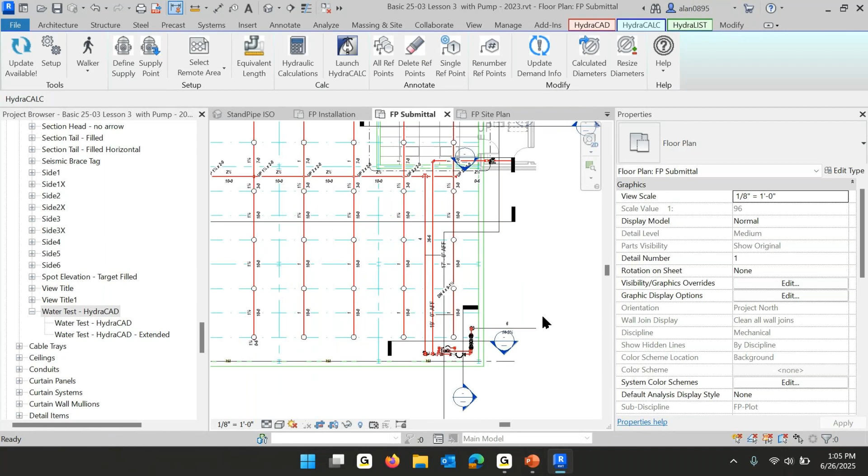Well, worst case scenario, I don't have a supply, so I'll have to go ahead without it. We're going to do WW to select the system and the underground, and then we're going to run a calc.

So WW gets the system up to the butterfly valve there, and then WW gets the underground, and I'm presuming that goes out to the street. Then I'm going to do calc, and this is complaining there's no water supply, so it's simply going to use 10 static, 10 residual at 250.

Now this is what's new. If your selection set, if your walked pipe selection has got a pump in it, then you get this dialog box. So I'm going to put the rated pressure at 50, and I'll put the rated flow at 500.

And the churn pressure for the pump, the pressure at no flow through the pump, is 110% of the 50. Make an NFPA curve, that's the water curve. Dave, you remember we drew 2 points in a straight line through it when I showed you that water supply curve before?

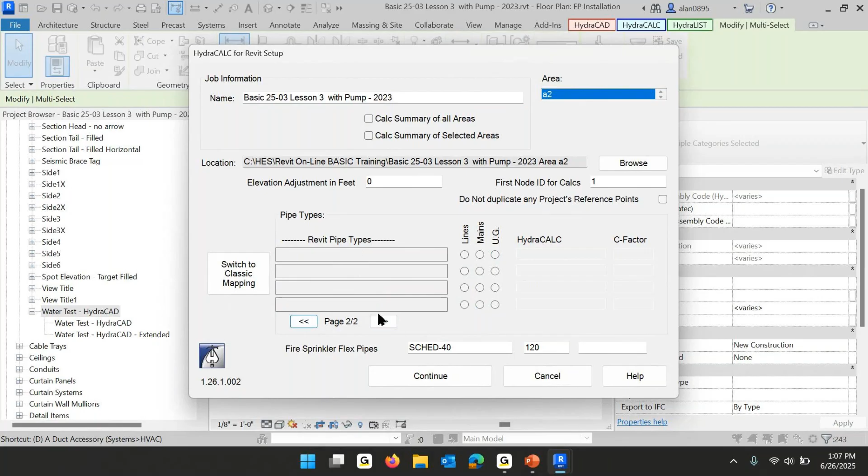And then this should all be filled out from before. I'm looking for area A2. My underground is underground, my lines are lines, my other lines are lines, and my mains are mains. And there is no page 2, so I'm going to continue.

That's the error, that's not an error. You can see that I have blah, blah, blah to PO, and then PI to blah, blah, blah the rest of the way down through the calculation. I'll run a quick calc on that.

And it says, so far, so good. I need 248 gallons a minute. I think I'm not picking up any hose flow, and I should have seen that when I started the calc.

Yeah, there's no added flow, there's no hose flow. So I could either add that in manually or just note the fact that it's not there. The fact that it says pressure required is minus 17 pounds means we have 10 pounds, which is more than enough if we only need minus 17.

When we graph this, we're going to graph the demand at the pump outlet, or at the pump inlet, and we're going to show that the pressure available at the supply is the pressure at the supply. So we avoid showing that negative 17 pounds to the authority having jurisdiction.

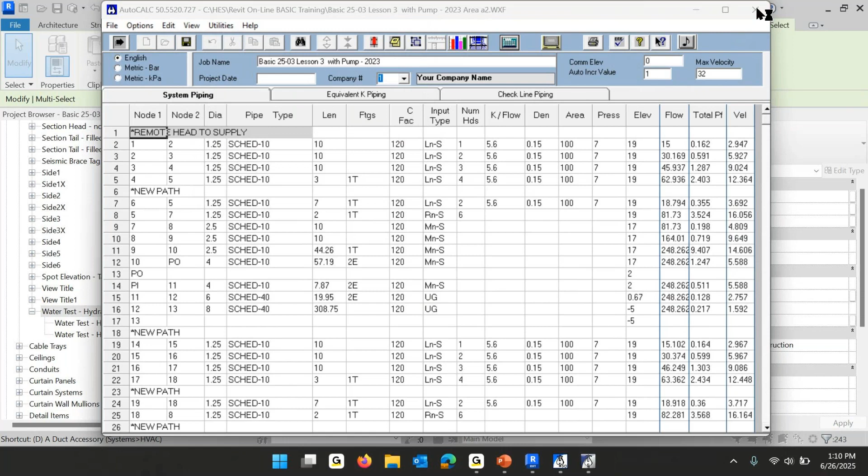And return to Revit and park that answer block. And that said, there are 4 reference points someplace else, so I didn't see the reference points that belonged on here. I can pick all reference points on this view to add 1, 2, 3, 4. That looks like a whole bunch that were there before, but that'll be fine.

And I want to go look at my slides again. When you insert a fire pump, I'll maybe cover that on Friday on our final 5th lesson, fire pump.

And then when that pump is part of the selected connected model, we get that question about what's the rated pressure, what's the rated flow, and it draws that curve. How does it know what a fire pump is?

Well, I told you before there's 4 major things: sprinklers, pipes, fittings, and pipe accessories. Mechanical equipment is the 5th thing that can be in a sprinkler system, and the fire pump is mechanical equipment. But an air handling unit is mechanical equipment, a sump pump is mechanical equipment, a toilet may be mechanical equipment. So how does it know which one is a fire pump?

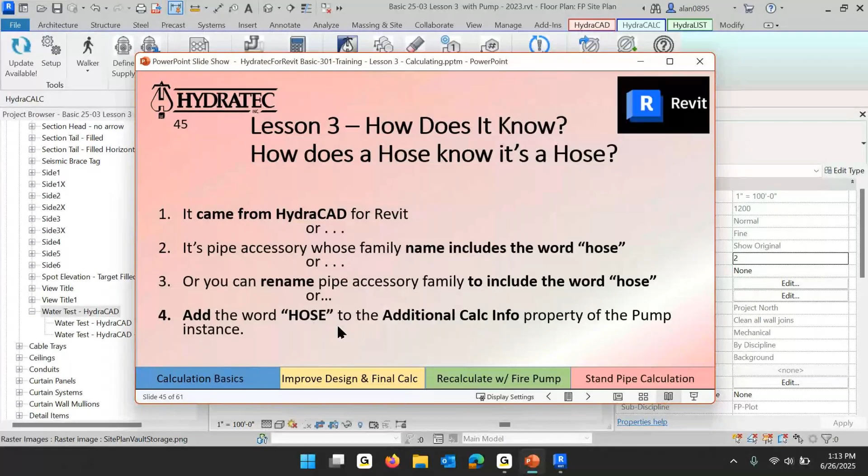Similarly, how does it know that it's a hose? If you use the add device tool and you put in a fire hose, it's going to have the word hose in it, and it came from Hydratec, so it's going to know it's a hose. Similarly to the pump, if you go to that device and find additional calc info and write in HOSE, then it'll know it's a hose, and you'll be able to use it as an operating fire hose.

Okay, quick standpipe calc. I already separated it, so I can do a walker on the standpipe and a walker on the underground. The hose valves themselves are in the stairwell and on each floor. Each floor also has a floor control assembly, just to be representative of what often goes on in a standpipe.

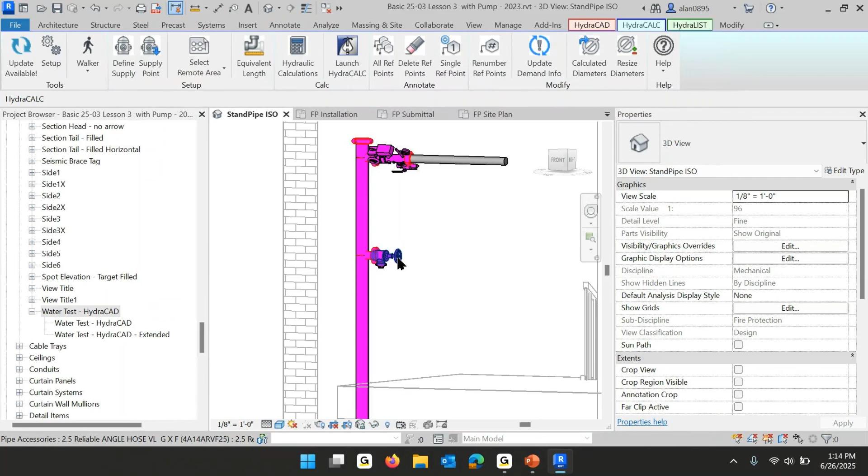Here and here. I need 500, I need 200 gallons a minute out, 250 out of the most remote one. I need a second 250 out of the other one on that furthest standpipe, and then 250 out of each additional standpipe. We only have one, so I'm going to operate that guy and that guy. So I've selected those two, and they have the word hose in them, and they came from Hydratec, so they know that they're hose valves.

And now down here under fire protection, I need to say that they're flowing. They're part of remote area standpipe 1. And the flow, I'm going to make 250 out of each one of them. And the pressure, I'm going to make this 125, 100 PSI. Okay, and then I'll just apply that.

And now I have operating heads, I still have a water supply, and I still have a connected model. So I should be able to, having filled those properties in, do the walker. I have the water supply from before. I may still get yelled at about we didn't find the water supply definition, but I can get around that. And then we're going to walker the underground, we're going to walker the standpipe, and we're going to run a calc.

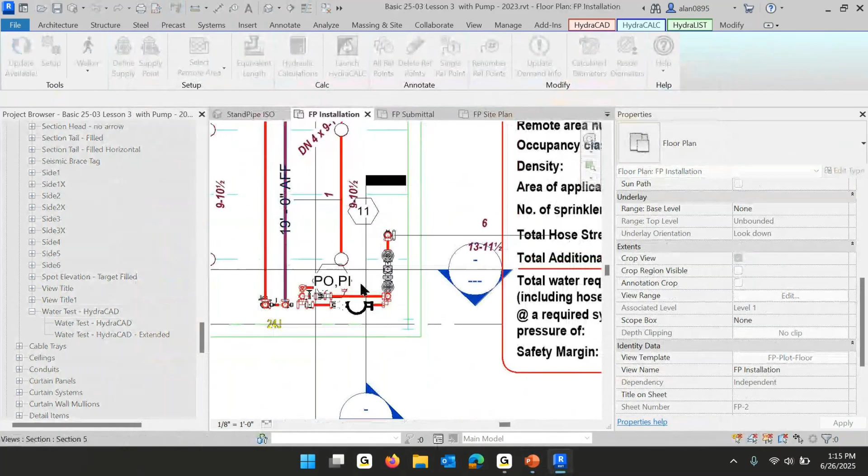So over here, let's do it from this view. I'm going to walker this pipe that goes over and up to the standpipe, and then I'm going to walker the underground, and that gets the rest of the way back to the supply point. And then we're going to do calcs.

And I'm going to live without the water supply, same way I did before. And I'm going to say I've got a rated pressure of before, I'm going to use the same pump as before. I'm going to say 50 pounds at 500 gallons a minute. Make water supply curve, pick OK. There's only 2 pipe types here, but those are underground pipes, those are main pipes. I'm good to go.

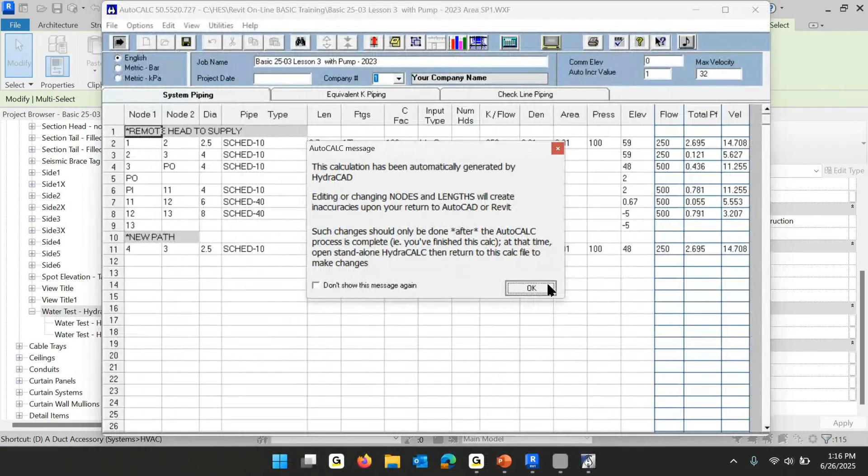It's a pretty straightforward calculation. There's 250 in that first couple of pieces of pipe, then 500 the rest of the way. And this is that second head, that second hose valve all by itself.

I'm going to run the calc, and even before that, I know the water supply it gave me was short. I'll go ahead and make that 30 and 25. And the flow was 1200.

Okay, I'll run the calc again. No heads flowing, and 64 feet of elevation. Those two make sense. And it says I need 500 gallons a minute at 93 psi.

I'm 64 pounds over the curve. Probably shouldn't be a big surprise, I only had a 50-pound pump, and I need 100 psi for the hose. So at a minimum, I need to add 65 or 70 pounds to the pump curve.

So I'm going to go change my water supply, edit the pump, and make the 50 at 500 into 120. That's 70 pounds more. Okay, run the calc.

And now we've got a 5-pound safety margin.

On a standpipe calc, there's a little bit more. I should make the flow be zero and see that I don't go over 175 any place. In this case, I don't think we're at any great risk of that, but it's part of the calculation that you need or want to do.

I'm going to close this, return to Revit, and park that answer block. There are 9 reference points that were placed, and there's still 2 more that need to be placed.

If I went to a section view, I don't see either one of these two sections currently showing that standpipe. I think it will now. Yeah, here's my standpipe over here with the floor control assemblies and the standpipe.

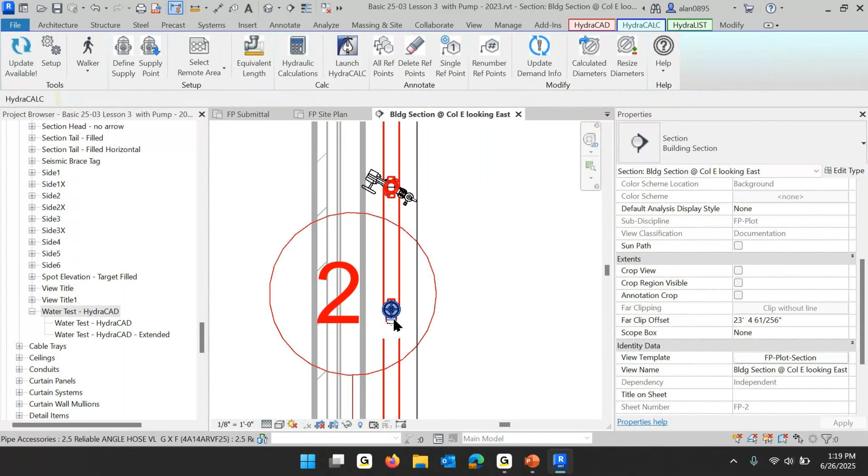I guess I'd like one that was looking 90 degrees to this to make it this one. And maybe, yeah, that one I need to turn around also so that it's seeing that. There, now in this view, I can add reference points.

And there's 2 to 1. Again, we could renumber reference points. 1 is the actual end of the hose valve, and 2 is the connection to the standpipe. And then I think 3 is on the standpipe, and 4 is that other valve. So we're good to go.

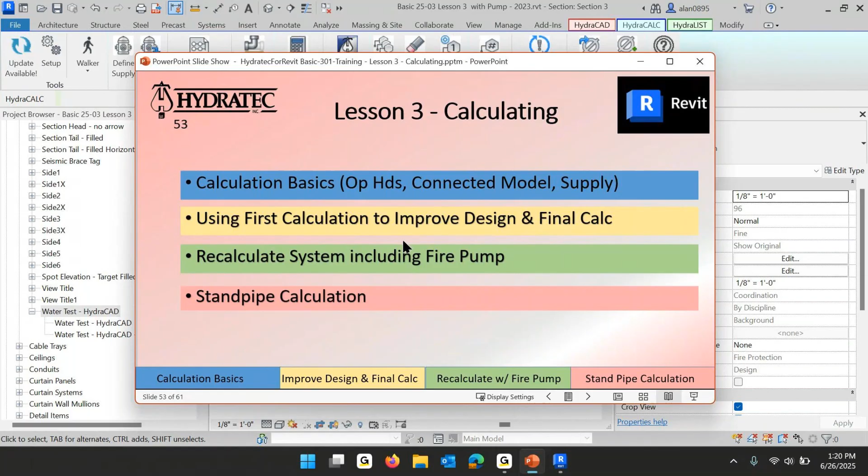I'll apologize for going over here like I did, but we did cover the hydraulics stuff. The recording will be good reference material because you didn't get to actually do it, but it might be a little while before you actually need the fire pump or the standpipe. So come back here and refer to the recording.

We did have those other lesson 2 things to get caught up on, but I'm going to skip through those again today and just push them on to next Tuesday. Except for the 2D details, general notes, and sprinkler legend, and then actually printing it out, we're here. That's where we are, and we've run through the calcs. Questions on today's lesson?

Brian, are you feeling a little bit better at the end of today, or did I race off at the end and scare the bejesus out of you?

No, I'm feeling okay. I mean, the pump and standpipe thing is going to take some work, but right—hell, it took work to learn it the first time in just regular CAD. So, right.

Learning all the other stuff is the right build-up to doing pumps and standpipes. That's probably not the right place to start. So we did race through it. You do have it as reference. I'm glad to hear you're feeling a little bit better this afternoon than you were early this morning. Yeah, I am. You can do this.